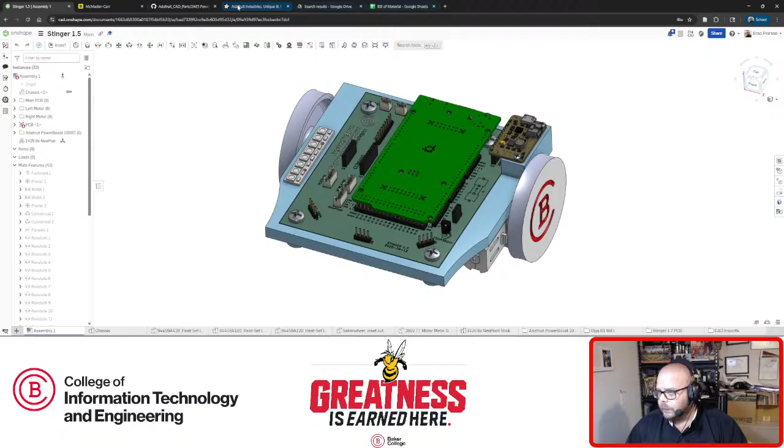So let's dive right in to our design, and this is where we left it off. I was just playing with some other tabs because on today's docket is getting our sensors put in this guy.

We stopped last week. We got the main Arduino board in there. That took a lot longer than I was expecting. We also got blocked in.

These will be little LED strips, Adafruit calls them neopixels. The idea behind those is just to give it some bling. These things are mostly intended to draw attention and interest from students at college fairs and career fairs, so giving them a little bit of the shiny is kind of a good thing.

I think we will dive right in and start getting some sensors in. When I brought the screen up in the first place, I was looking at the bill of materials because some of the sensors I need are in here.

Things like this here, the long distance IR proximity sensor - that's a sensor that goes underneath. On the existing robot, grab one of the originals here - underneath are two of those sensors. The idea is those are light sensors we can use to follow a line, do the whole line following thing.

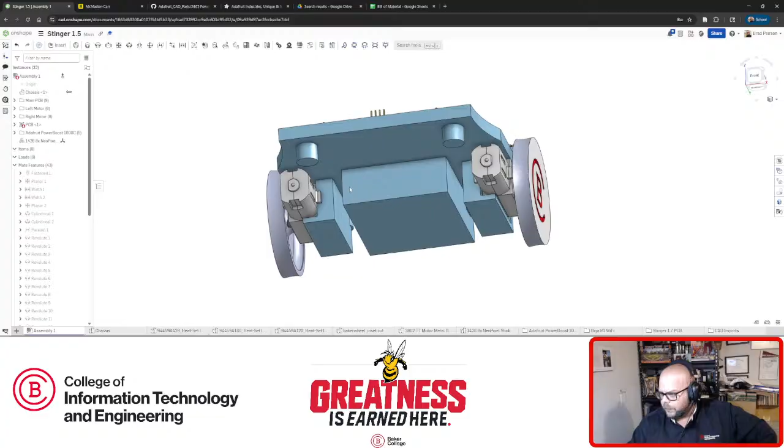So what I started to say - all of those things go underneath, but I've also made the decision to add 3 sensors to this guy that don't point straight down, but point forward. In fact, the plan is to orient them the same as these connectors on the top. As I keep going, I don't clean up my desk, so I end up with a pile of parts.

The ultrasonic sensors ultimately will get plugged in, though, and again, the solid model there I sort of screwed up when I did the PCB design and used male pins instead of female sockets, which doesn't really matter - they have the same footprint. These get soldered anyway, so from a mechanical design standpoint, they don't matter.

At some point I probably want to trade them out so I can get everything in here and maybe do a rendering, which I think would look kind of cool. Of course, to do that right, I also have to get the connectors for these cables and the wires in, the few wires that will be in here, which is frankly kind of a pain.

Might be worth it to someone watching this in the future - hi from the past, by the way - to show how to do wires in sort of a quick and dirty way. It's not really mechanical design, though. That's strictly to get the wires in here, strictly for appearances. So we'll get there when we get there.

But first off, the sensors are sort of facing forward, and I also have Adafruit open already in my tabs, because honestly I don't remember the sensors I bought for those. I went with IR, and I think time of flight. I'm just going to hit this - I don't remember. And the bad part is they're already sitting on my desk back on campus. I don't really remember which one I bought. I don't think I paid $15 for them - that would have been kind of weird of me.

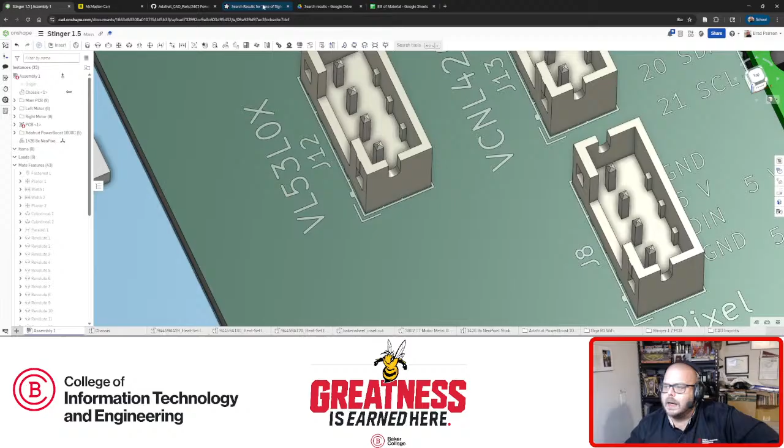53L0X - 53L0X is this guy. And that is product ID 3317. So I'm going to hop over to their CAD library and see... 3317, we don't have one. Well, we got a 3316 - does that match one of the other guys? Not one of those.

3967 is a thing. 3967 is not in there. Well, let's scroll all the way down - maybe something got out of whack, just to make sure. Yeah, I don't see it. VL, I wonder if it might be under the VL something. Maybe, I don't know, let's just make sure. Just double check, make sure nothing's getting lost here in the alphabetical - but it's kind of easy to be alphabetical when everything's named numerically, right? So everything should be in numerical order, I would guess. I don't see anybody hidden.

Panel mount LED. So, all right, what's one of the other ones? 3317 doesn't exist, 3967 does not exist, 5425... 5425, 54... Nope. Man, striking out all over the place.

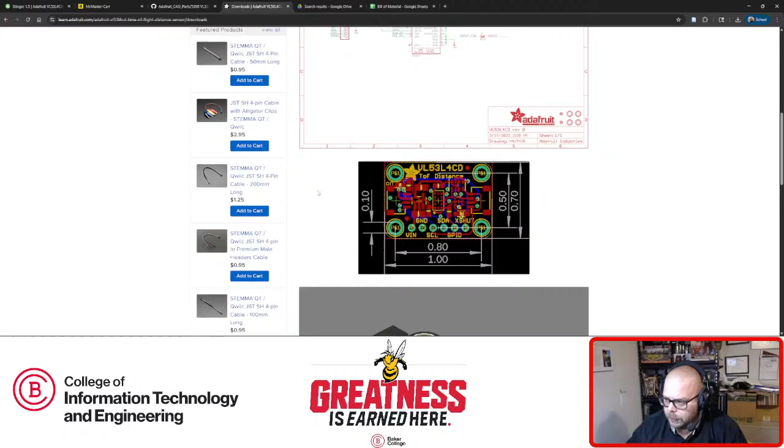If we switch back to our model, measure, parallel axis, 0.8. And just for verification, go vertical as well. Not min distance, because I clicked wrong. I don't want min, I want center. Half an inch on center. So probably not the same part number, though it's based on the same PCB. So they changed some components apparently to get a different range, which is fine.

It's good for us. So first thing I want to do is, I know when I bring that in, it's going to give me a hassle as far as mating things, right? If I mount this PCB, we've seen it before. So I need to first fix. I like to fix the board; it doesn't really matter what we fix. And then we're going to select the board and everything else, shift all of it, and group them together. That way, once we accept this group, when I bring this assembly in, nothing will move, and that's carried over to this.

And I'm actually going to use this assembly. These are effectively the same assemblies, and I don't know why I get two when I bring parts in that way. But I'm going to use this one because then in my bill of materials it'll actually show up with this name, which, even though not quite the same part number, gets me kind of close. So I'm going to go ahead and bring one of those in. Just one for now. Did I not hide the rest of those? I guess not. We're going to bring in that guy.

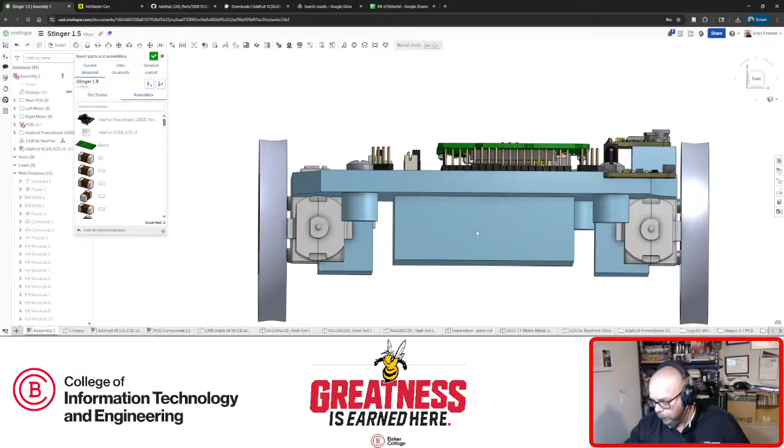Alright, I'm going to put it up here. Now again, these need to be mounted, and I'm going to mount them underneath, because we can't have anything hanging up. If we look at how these ultrasonics mount to the front there, I can't have anything sort of up, otherwise it'll interfere with the ultrasonic. So my only option is to hang them down. And the cool part is we've got the motors and stuff hanging down here, so it's not really adding any height to our design, which I like. Keep things nice and slim.

So what I need to do first is get a platform, some sort of backing in here to get this guy mounted. The thought process running through my head right now is how best to do that. I need to get that guy in there underneath here in a way that lets me still mount everybody else. And since I know I need to have one angled, the front one's kind of easy, right? I can always stick a rectangle down here and get the front one.

But what I'm thinking right now is I kind of need to make sure I don't encroach on this screw hole, because if I just put, let's go ahead and edit the chassis, and I'll show you what I'm sort of thinking about. If I just sketch on this surface, and if I just sort of put the platform, let's create an aligned rectangle. If I were to just extrude like this way, I'm going to guess at what a 45 is. Like, I need that much material to mount the board. I'm going to be hanging way out, and I'm going to be in that screw hole. And effectively, the screw hole is going to be in the way, right?

The screw hole, like, in reality is not in the way because the screw hole is kind of inviolate. I need that to be left alone. That's sort of mounting my main PCB. So that's sort of inviolate. I can't touch it.

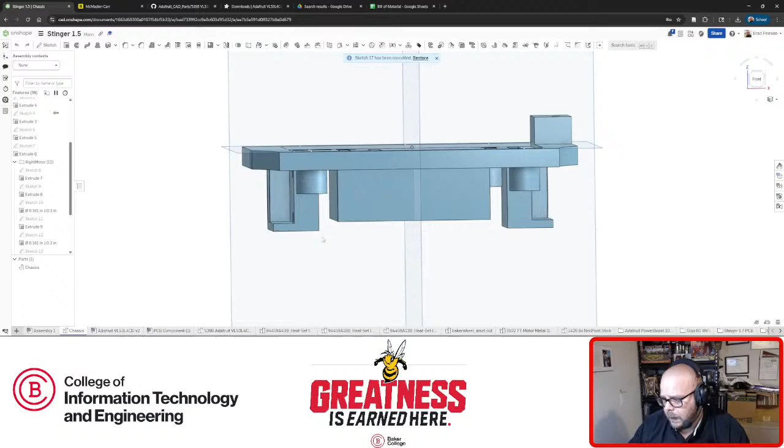So, I mean, I'm kind of curious. I'm wondering if I could go right off of this surface, sort of bring it down, bring whatever mounting feature I create down, and then use these screw holes to sort of hold it in position, be the material that holds those mounting areas in place. That actually does not sound like a completely terrible idea. Let's do it. Why not?

But what I'm curious about, what's the height here? Parallel distance, 0.641. I mean, I got plenty of room. If we look at the assembly, I got plenty of room between the underside. This is the underside of the motor mount and the wheel. I got plenty of room to come down even further, but I want as much, for no good reason, by the way, I want as much ground clearance as possible. No good reason. But I want ground clearance.

Now, that may change. I will be honest, I have not looked at the specifications of that IR sensor. So I may have to get it way down low anyway, but for now, I'm going to work with the idea that I want to maintain as much ground clearance as possible, and I basically have 5/8 of an inch to play with. Is that enough? Now is going to be the question.

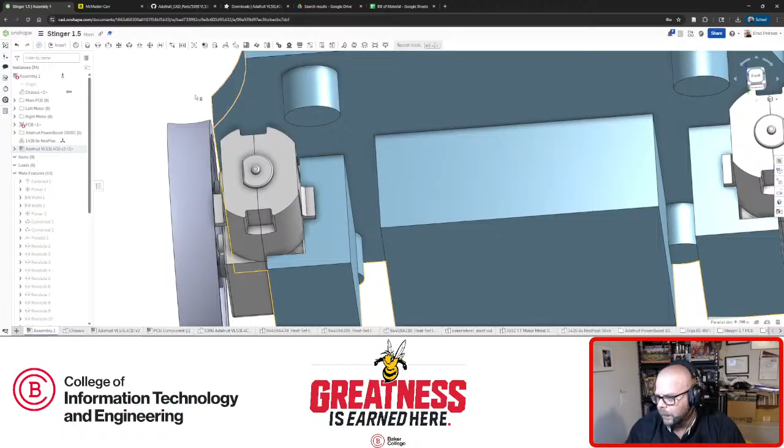So, what is the total width of this thing? If I mount it, obviously narrow side, sort of vertical, 0.7. So I'm not going to have enough, but that's still okay. It'll be hanging down a little bit if I use this surface, this plane, as the basis for where those mount. I kind of do like that. I kind of do. Now I'm trying to think about the best way to, like, I want to use these as the plastic, the material that holds the mounts in place.

Aesthetically, I'm jumping ahead to looks. I'm not going to like the look of just two cylinders hanging out down there. So I'm probably going to add some material in between, even though that increases our weight. Probably going to add some material in between just for looks, and make this, rather than two independent cylinders, make it, I don't know, a rectangle, a bean shape, or a slot shape with rounded ends. Something like that is where my mind is going right now.

So let's go ahead and do that. Well, I can always do this. I'm going to go ahead and, well, I got to be on the chassis first. And we need a bottom view. I'm going to go ahead and sketch in whereabouts those features need to be. So I'm going to create a sketch on this plane, even though I'm going to add material before I actually get around to really creating those mounts. But for now, I just want to sort of sketch in where they need to be.

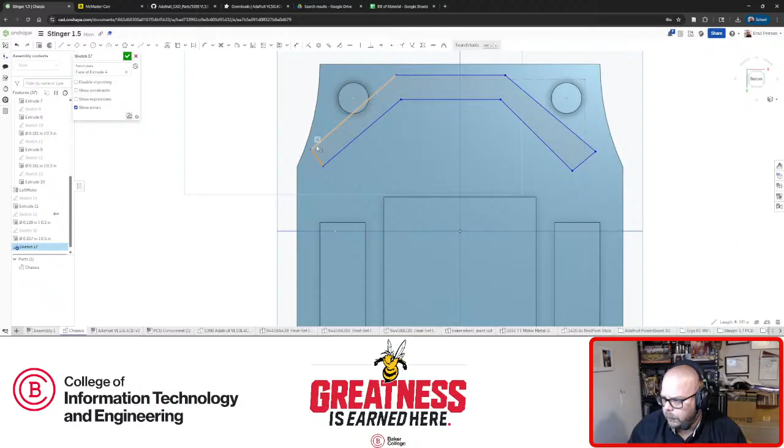So we're going to go here. And at this point, I'm guessing. This is just a guess, but I got one pointed forward and two pointed out to the side at 45-degree angles. So we're going to start to constrain the sketch. Those guys will be perpendicular. These guys will be perpendicular. Nothing up there will be, but these will be perpendicular, as will these. And things will move around. That happens sometimes when you're dealing with this stuff. Except, why won't you let me? Has this got to move in? Will you let me swing it then? There we go.

And with it being underneath, we can kind of leave it set back. I like that. That means this sort of leading edge of the chassis will act more as a bumper. Like, if they run into a wall, they won't be smacking into my sensors.

So we need 45 degrees. Why? Just because that's what the originals were, and I don't see a reason to change it. So we need 45 degrees between here and here. That'll bring that in line. 45 degrees between here and here.

All right. Now, I'm also going to go back to the assembly and grab sort of the, and actually I don't need the assembly, I just need this. So overall, I'm going to go bigger than the board because we also need to get the screw bosses in, the threaded inserts. We can't forget that we need enough material for that. So I'm going to go longer, but we're an inch long. We need an inch for the board.

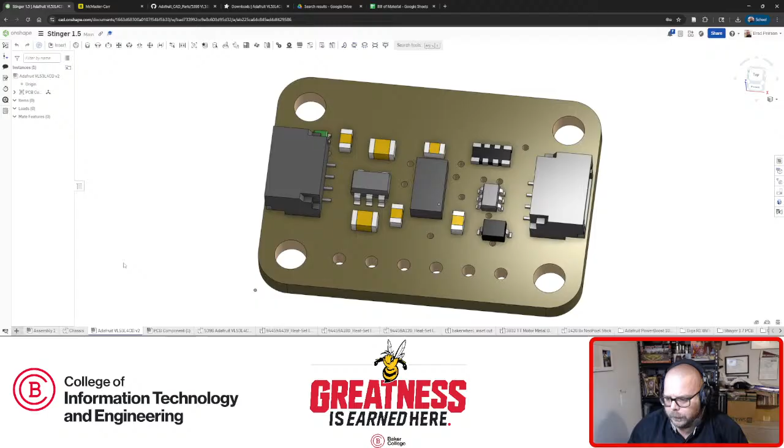Not Alt-Tab. That's a workflow thing, SolidWorks. I'm used to Alt-Tabbing. And I want chassis, not the assembly. Go back to the bottom view, make sure we're good and square.

So we need an inch. An inch and a half should be plenty. Again, that's just a guess. There's not really a thought process behind it. Just an inch and a half feels safe, right? We need an inch and a half to mount the board and leave us enough material.

So I'm going to set these as equal. I was going to define an inch and a half at each, but I like equal better because I know they're all the same part number. I'm also going to set this equal. I haven't set the thickness yet, but I'm going to set that equal. Equal.

And I need a construction line. So I can still move this, right? I can get way thick, way thin. I don't want that. I want this to be uniform. Like I say, I don't know exactly how it's going to end up looking quite yet, but I want it uniform. So I need a construction line to make that happen. And I'm going to go center to center, basically. Make this a construction line. There it is. Now I can set that construction line equal to the two ends.

Now no matter what I decide, I haven't done the mathy yet, equal. So now we're equally spaced. Once I set a thickness, it'll change everything. But we know we got an inch and a half at least. We know we've got enough material for screws.

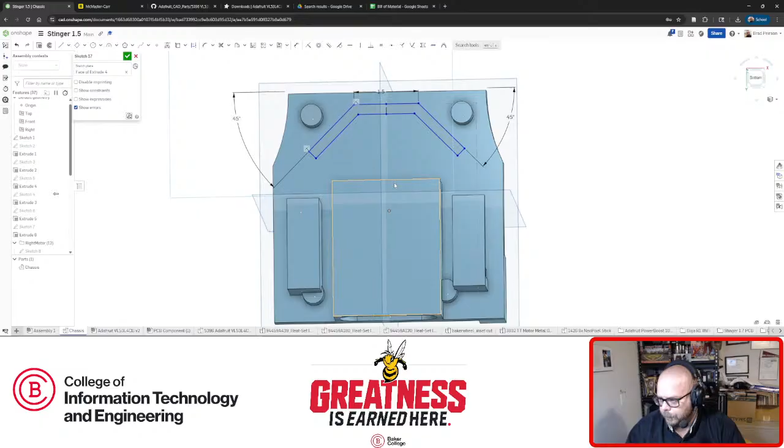What do we want to do? If I do this sort of this way, about where I've got it, I can build out from here. Rather than just sensor mounts for those 3 time-of-flight sensors, I can make this an entire surface for the purpose of sensors. I can squeeze the 2 light sensors for line following in this gap. I can also squeeze the RFID on it. So why wouldn't I do that?

Let's just focus on this for now. I can always add material to make a whole sensor platform, because right now I want to make sure that these are in the right spot for the sensors I'm on right at this moment. And that's all I'm thinking about. So where do we like? I kind of like it where it is, just for looks. It's behind those screw bosses.

I'm gonna have to come up with a way to get all that attached, because right now I'm floating out in space. But for now I can at least lay it out and come up with a plan.

The other option is, since I know I'm not going to hit those screw bosses now, I can always accept the sketch, and I can edit. Well, maybe I didn't need to accept it. I can change the sketch plane to this, and it won't affect anything. So now it's on that, and when I extrude, it's sort of automatically connected.

I'll just have to make sure now when I extrude, the material between the bottom of the chassis and the bottom of the screw boss is dead material. So I need to come out that much before I even consider the height of the sensors. That 0.7, I think it was.

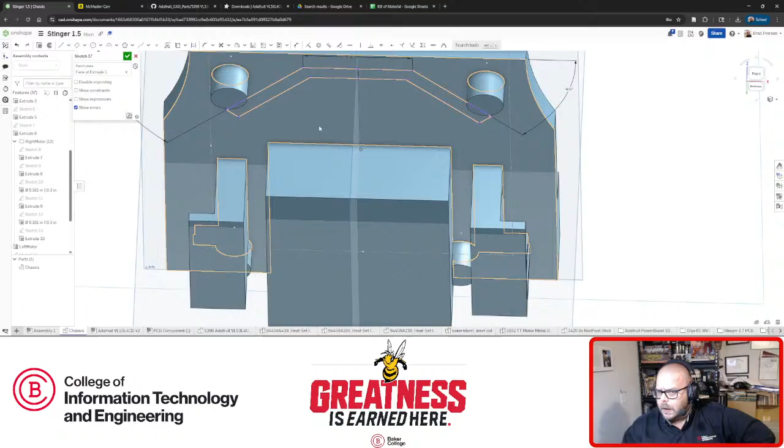So that's a thing that I need to remember now that I've done it this way. But that works. I am not unhappy with that, and I think I like that plan of getting those others. So I am going to change my mind, and I am going to get those other sensors in there.

And those sensors were, the ones that exist, the light sensors, are 6064. So without even going to their website, I'm just going to jump in here and see if I can get a 6064. Yes, I like it. The step file, download that and get it into my assembly. So here, import 6064. Import again. I'm not going to worry about the composite because I'm wondering if I can tuck those right in here and do this as one platform.

And then for the RFID, I can just make the battery compartment taller, and really just tall enough for some threaded inserts. Like, we've already got material here. It's about as thin as you can possibly get for the battery. But if we just add on to this surface and make it taller, add plastic, for threaded inserts for that RFID board, that wouldn't be a terrible idea, I don't think. I mean, I don't know. It's a guess, but it doesn't sound horrible.

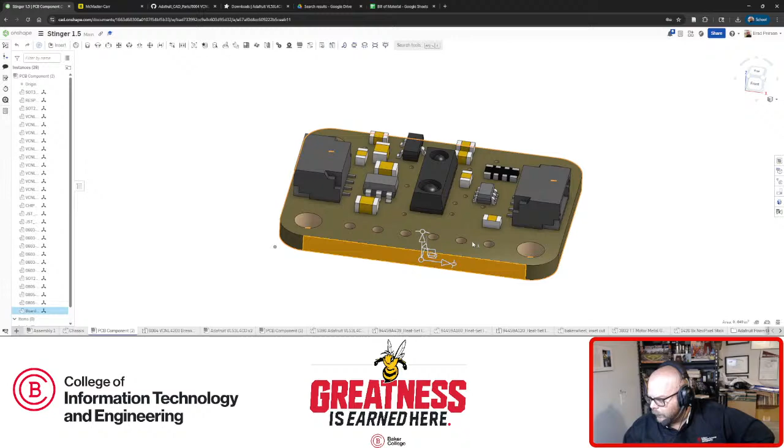So did that actually bring that in? It did. So this is the other board. Tell me it's got the same footprint. 0.7. Yep, same footprint. So I think to lay it out, I'm just going to put squares in that sketch for now, or rectangles. 0.7 by 1. Is that what it is? 0.7 by 1. And do that.

And what does that look like if I go back to the chassis in the bottom view and just drop, I want it straight this time, here and here. And if I just go equal, whoops, no control, just click, folks, just click. That's one of the workflow things, Onshape versus SolidWorks. Just click, no control, click. So equal, and I also want coincident, I want them in line. Coincident, and make this a 1, and make this a 0.7.

Now I'm going to probably delete these. Right now they're just here to see where I can fit things. I want to spread them out. I need to be very careful right now that they don't get too close together. They are electrically going to be daisy chained together. These connectors, there's an in and an out. You can daisy chain them together on an I2C channel on the Arduino. Let me double check that and make sure I'm not completely making things up. 6064, I believe they're I2C.

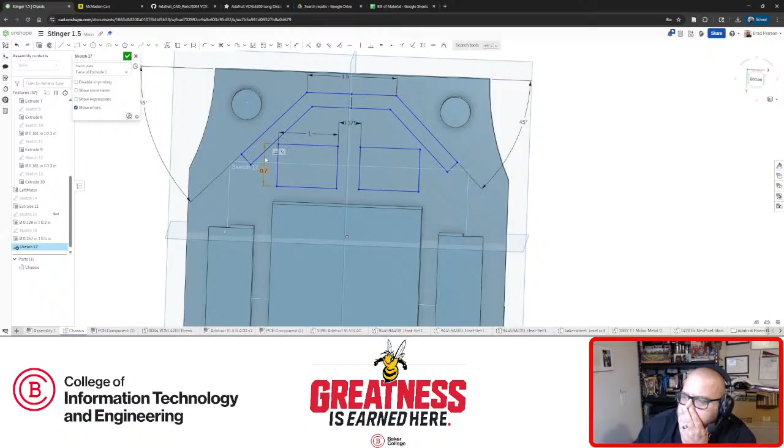So let us head back to our chassis. And I guess we just sort of guess at a dimension between them that we want. 3/8. That's not very big, but also it doesn't really need to be. I need enough room to get the connectors in and to be able to bend the wires enough to tuck them up somewhere, right? Because the pigtail is only so short, so it'll be tucked up maybe in here somewhere. I kind of like where we're at. I kind of don't like how much plastic I'm about to add.

So before I do anything else, I need the thickness of this correct. Yes. Me speak English goodly. I need this thickness correct, which means I want my board here. So that is a 0.098, handy dandy calculator. 0.098, 25.4, and it helps if you use the right direction. That's a multiply, buddy. 2.5. Did we have a 2.5 millimeter somewhere? I'm trying to also commonize screws.

I'm also trying to commonize screws, and I don't want to mix and match too many different types unless I can help it. So what was this? That's the smallest one we have in here so far, and that is an M2. So what was the diameter of this hole? Let's deselect. What was the diameter of that hole? 191, that's even smaller, so that truly is an M2 hole.

But I think we can get away with an M2 screw in a 2.5 millimeter hole. In fact, I think that's probably the good plan. We're going to use M2s. We'll go with that. So that said, we need to head to McMaster for our handy heat set inserts because I don't remember the depth I needed.

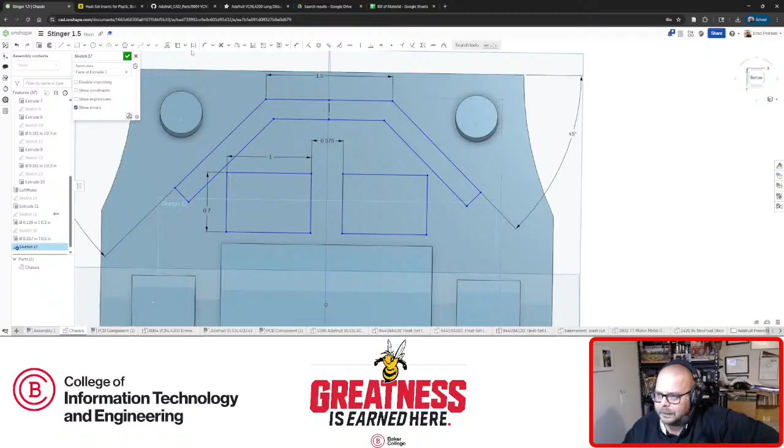185. I'm going to call it a 1/4 of an inch. Now, in the case of these, I'm going to call it a 1/4 of an inch just to give about 70 thousandths of material behind it, so the inserts don't stick out. So I can set that right now before I forget it, and then I don't even need to write it down. Look at me remembering, good practices. So 1/4 inch. That gives us like 65 thousandths over what we actually need. That's great.

And I think what I want to do is I want to back these up a little. And I think I'm going to want those to land almost even with the battery box. Well, for line following, forward is probably better because then it'll catch the line a little earlier. But for layout purposes, I don't see that being feasible. I mean, I could come out, I guess, even lower than where those forward-facing sensors end up. That's not the worst idea I've ever had either.

And they land in there, and that's actually going to get us away with the minimum material. So change of plan. I was going to make a big piece of plastic, something like this shape that I have. If you could imagine a line or a curve, I was going to curve it between here and here and make it nice and pretty. But I think what I'll end up doing is extruding this shape first to the height I need it for those sensors, and then adding material onto it, sort of in this neighborhood,

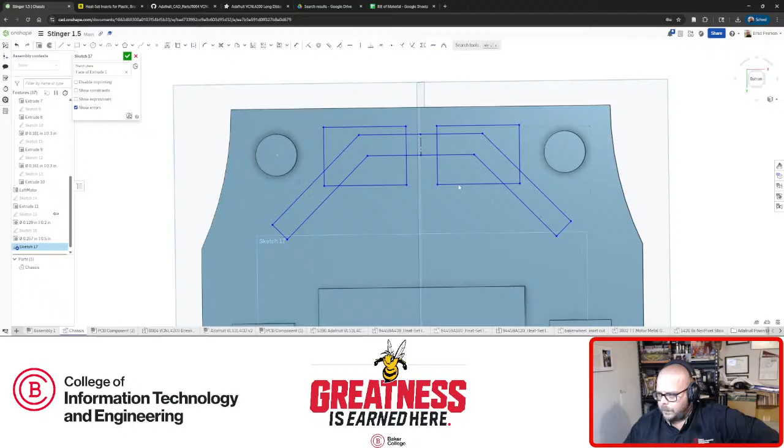to get those line followers, and even for aesthetics, I can center those between the holes, and that would look, I think, pretty good. Aesthetics, like I said, at this point in the design, I keep saying it's as much art as it is science, and it's what you think looks good, right? We're designing a part to be 3D printed. In 3D printing, with even a cheap 3D printer, I can make almost any shape I can imagine. So it's just making it look the best I think it can look.

And I think that's going to end up being the best, if these are in this neighborhood somewhere centered, I will also line this up with the center of the holes. It'll be nice and offset back. I like it. Now, on these parts, the one thing left that I want to check, I need the assembly, not the individual parts. There's nothing on the back of this board. Oh, there is. That's right.

Well, no, because I'm using the I2C connector, I don't need to worry about those. There will be nothing in those pins. Like if I look here, as long as you use the I2C connector, you don't need headers there. The headers are there if you're not using the Qwiic connector, they call it.

So that's what we're doing. And why did I grab a $14 sensor and not a $7 sensor? What's the range on this guy? Does it tell me? 1.5 meters. Nice - oh, that might be what killed it for me. 50 to 100 centimeters is their target range, but the ones I grabbed are good for a true 1.5 meters time of flight. That's really the reason I decided to switch off these for the forward-facing sensors.

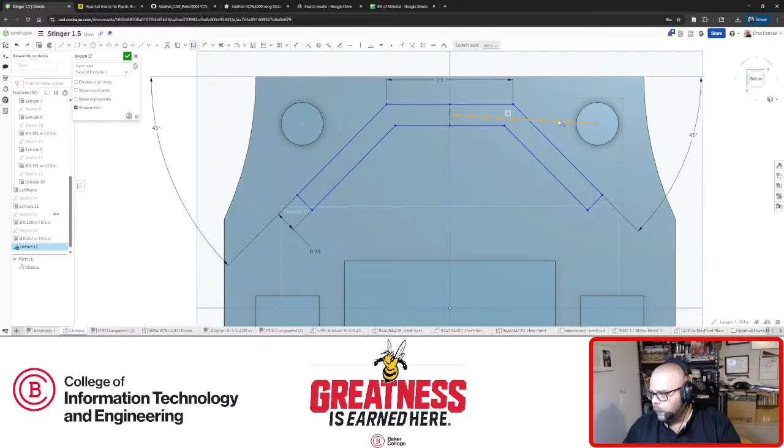I do want to position this guy. I'm going to construction-line it to one of the holes - the holes are on the same line so it doesn't matter which one - and make it horizontal. That will lock everybody in. It's centered now.

We got a 45-degree view, and we're actually pretty close to in line with where the ultrasonics will be. The ultrasonics are a little forward of that, but everybody should work out that way.

So now I need to extrude. I'm going to accept this sketch, that's it. Again, in the future I will come back and fillet everybody - I'm not going to leave it angled like that, it'll be nice and rounded with fillets toward the end. But for now, like I said, this is dead space.

I've got to come out this far before I even figure in how much taller I need it, and that distance is 385 - handy dandy scratch pad, it says 385. So we are 385. And that sensor board is 0.7 tall, right? Is that right? 0.7 tall.

I'm going to give it an inch and see where it lands, just because I can. So total we need 1.385. Now that might be too tall - we'll see where it lands after I extrude it. That's a distance I can easily change.

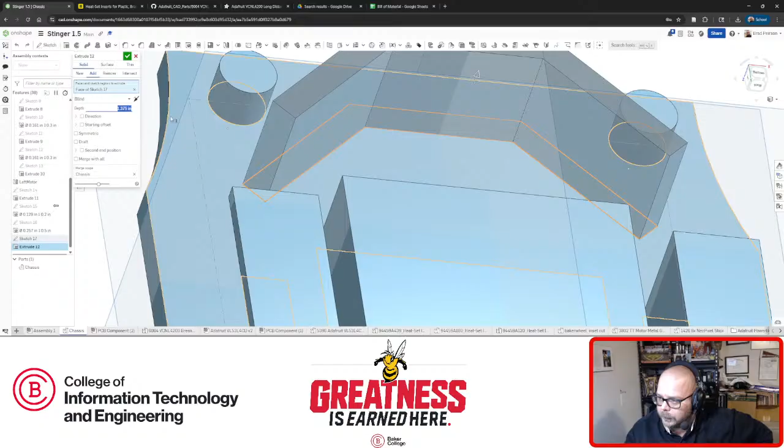So total, I'm going to grab this and extrude it a total of - what did I just say - 1.385. And actually, just for round numbers' sake, I'm going to go 375. Only someone used to dealing with the imperial measurement system would you hear somebody say 375 is an even number. That's a weird statement to make, right?

Yeah, so I mean it kind of makes it look more car-ish, I guess, question mark. But also, looking way ahead, this gives us some material out here that we can maybe put some feet on, like those carriage bolts I talked about previously. I'm not nuts about how far those stick down, but I have an idea.

So let's get one thrown in here, shall we? To get one thrown in here, I'm going to click here and sketch on this surface, and realistically to get that hole pattern in here I'm just going to go like this. I only need a rectangle, because I'm going to grab the points - the points are the holes. I'm going to use the hole wizard, so just a rectangle with some points. I do need it centered, so grab a line, construction line centered here.

Construction line - don't forget to set it vertical and make sure you're in the middle. Let's go to the front view so everything's nice and lined up. And dimensionally, I was, what, 1 inch by 0.7?

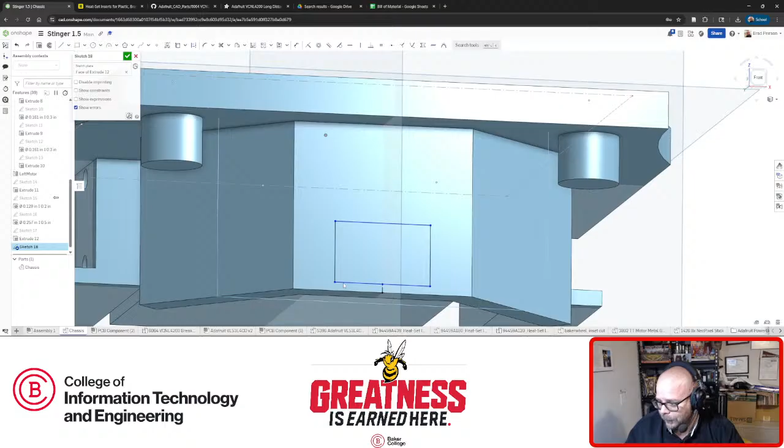Good. Now what I really want to see - because what I'm thinking is, looking at this, I went ridiculously tall. Somewhere I screwed up my measurement by a lot, right? We're almost twice as tall here as we have to be. So my comment about this being way low is going to change in a minute. But I'm also thinking the sensor itself, the board, does not have to be below these screw bosses - the sensor does, and that means it could probably be up in here somewhere.

So I'm about to start taking a look at some measurements to see about where that is.

If I just go shoot for the top of the sensor to the top of the board, it shouldn't matter because it should be in the middle. So 262 there, 263 there. It's in the middle, right? So if we call it a quarter inch, that gives us 10 thou.

I don't know how accurate this model is. Like if this sensor block thing is actually dimensionally accurate, I have no idea. But if I call it 260, I got to go the other way, 262. So if I call it 300 thousandths... well, if I just place... no, because I want this.

So 262, I'm going to put a line in my sketch, and I'm trying to think of the best way to do this. It's going to be a construction line. And I'm going to put it 262 away from the top. That sounds like a winner.

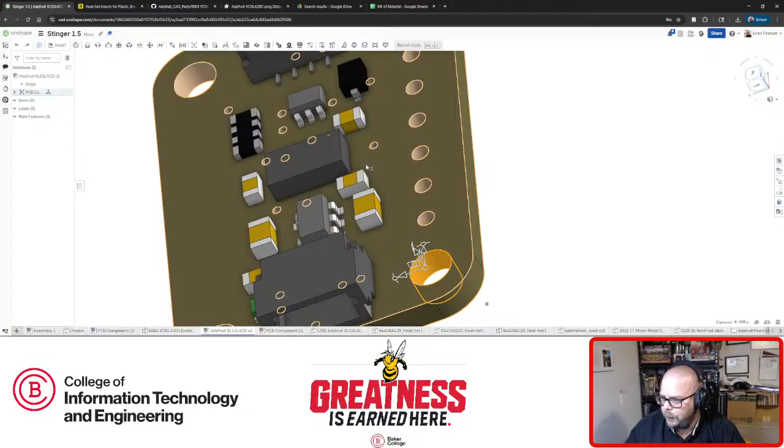So this line now, why does that not feel... oh, because it needs to be from the hole. Important note, it didn't look right. It needs to be from the hole because that rectangle is not the board, it's the hole. So from here to here, and I don't want min, I want center.

162. 162, and again, not Alt-Tab - that's a SolidWorks habit, no Alt-Tab here. 162. That looks a little better. So this represents where the top of that sensor is.

And now I want to define this whole position of this pattern based on this line, because I don't really care where this lands, right? I got all the material behind it that it needs. I don't care where it ends up. So can I dimension off of that surface is the question.

That would be ideal, like if I could say I want to go from here to here and have it be 20 thousandths, 30 thousandths, whatever. That would be ideal. So let's try it. Here to here - will you let me? Oh, look at you. Let me grab a front view so I can just make sure that that's...

So I have noticed, we need to be careful because SolidWorks doesn't do this. Onshape does - whenever these are construction lines, as soon as I bring my cursor, it treats it like a diameter, which is actually kind of cool. I was doing a different part earlier today for another project and used that a lot. That comes in handy, so I'm not knocking it, but it's the thing to remember, right?

This is diameter down here, we need to be up here. And we don't need 100 thousandths - I'm actually just thinking to start with 50. And that makes sure that the top of that sensor block is below the screw boss, which means if this is in line, the ones on the side will be below as well.

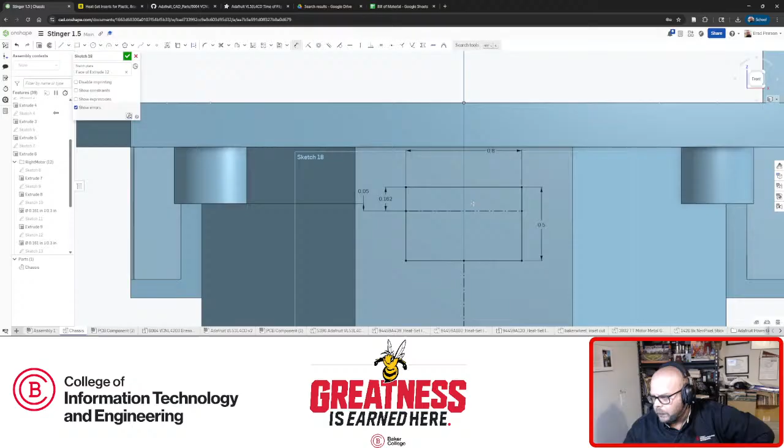Like the actual sensing thing is also below that surface. So for 50 thou low, the actual sensors, which are these dots, right - one's an emitter, one's a receiver - that will actually also be lower by that little bit. So 50 thou should be good. And that's sort of the thought process I'm using for that idea. So yeah, I'm going to call it good there.

I'm going to call that sketch good. Now I want to measure from here to here and see how much of this I can cut back off because I way over-extruded. So we're at 0.602 - I can cut off at least a half an inch of that, like at least. What extrusion was that? Down here, way down here. Extrude, edit.

875 should be less half an inch, right? 0.875. So again, this won't be vertically centered here, but that's not the important thing. And we probably don't even need the 875, but honestly, now that we're back sort of in line, I'm curious - is that exactly how tall the battery was? Yeah, so it's exactly in line now with the battery compartment.

This bolt pattern won't be centered vertically here, but that's not the important part. The important part is that this construction line, the sensor, the board doesn't need to clear, but the sensor does, and it should, if things are okay. Now I'm going to get kind of spicy.

This is me just wanting to play with Onshape. I'm going to duplicate this sketch on these other two faces. I want to see if I can put holes on all of those sketches at the same time. I don't think SolidWorks will let you do that, you have to use only one sketch. I could be wrong, I've honestly never attempted it. But I want to see if it'll let me do it here. So I'm going to do it.

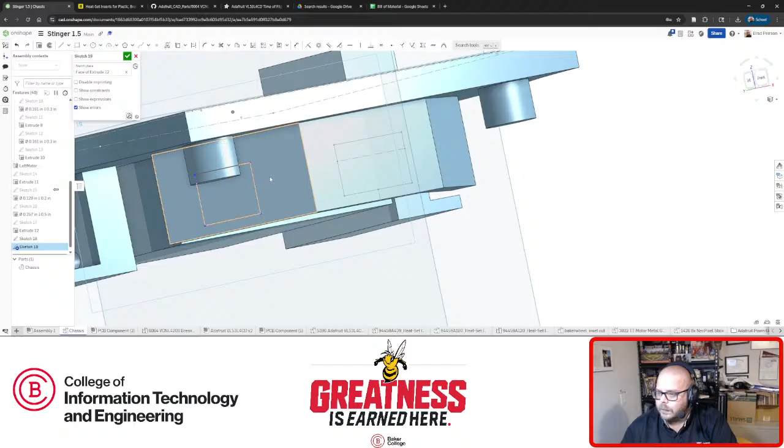And then all I have to do is center the thing with a construction line. Except I screwed up, I screwed up an equal somewhere. My rectangle is not nearly long enough. This and this are equal, this and this are equal. All right, I'm getting the impression that the equal thing is not working out the way I wanted it to.

What if, let's undo. All right, so we're raw, we should be pretty unconstrained. What if I make them in line? I'm just trying to cheat, also playing and seeing what Onshape will let me get away with. All right, so I just made these in line with these. And now what happens if I make, well, let's try the top. The bottom one clearly didn't work. Yeah, see, it doesn't like that equal, which is okay, I guess.

I just have to get that dimension. What's the length of this? That was the 0.8. Here, 0.8. I don't need to worry about my construction line across because I already set it along the same perimeter, set it along the same height, right? So it should land in the same spot, so we should be good there. I just have to center the thing. I will need a construction line for that into the center of this guy.

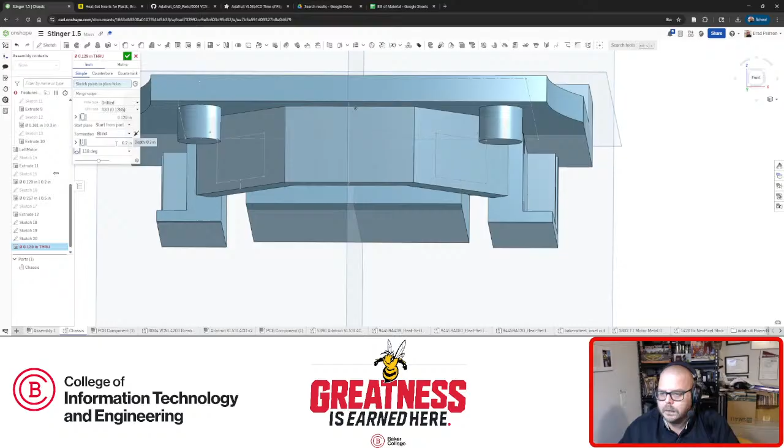So termination blind, 0.2 is already there. Make them flat just like every other one. Now sketch points here, here, here, here. Oh, that's lovely, I like it. I like it, and that's exactly what I wanted to see.

And it would let me do all of those sketches at the same time. That's kind of awesome. So, except that, that's good. Those are all my screw holes. Now, I think I'm okay with that.

Because again, if these were pressed in, I would want more material there, because what will happen is as you press, you're sort of by definition moving the base material. A press is an interference fit, that material's got to go somewhere. The heat set inserts we're not pressing in, we are heating, and the plastic around them is liquefying to make room for the insert. So we should not need as much wall, and we shouldn't get bowing.

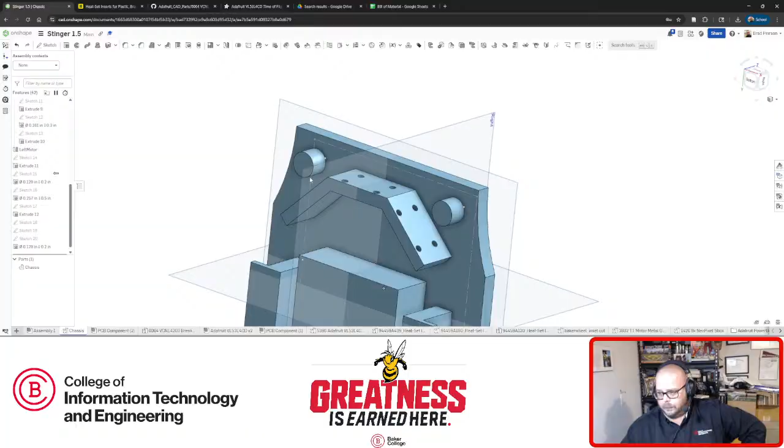Now, I'm well aware of what I just said there, and that the word should is very strong. So that's really one of those things that I'm not going to know until we build one. We know for sure until we build one. So, but I do kind of like that. I do kind of like that. I'm kind of happy with that.

Well, the question was in the back of my head. One thing to pay attention to that just hit me before I have that other aside thought. As I was spinning this around, one thing I noticed, we want to make sure that in all the fanciness that I just did, we can still get at these with a screwdriver, right? All the plans in the world kind of fall apart if we can't actually get to these, one, to put the inserts in, two, to get the screwdriver on them. So that should have plenty of room for both. The soldering iron, honestly, might get a little tight with the heating tip on it.

I kind of live with that. I think we can get it in there, even though it'll get a little close to this. And besides, if that's a worry, these are definitely worries, because those are a lot closer to the walls than the other ones. And plus, I don't necessarily need to heat them all.

I have had good luck with these types of inserts in the past, just pressing them in. They do hold pretty well if you just press them in. The knurling really does a good job of holding. So I might be able to get away with that if, when I go to assemble these, I run into an issue. But yeah, like I said, I kind of like that. I'm kind of happy with that.

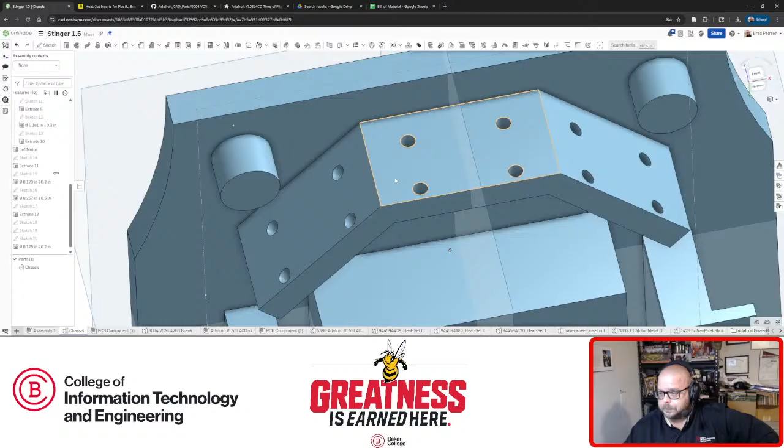I do want to make this transparent quick and just check that those holes have enough backing. I think they do. I think that's enough. And an important thing that I got to keep remembering is, realistically, until I get this in the slicing software for the 3D printer, I'm not going to know what direction I want this on the print bed, right? I have no idea yet.

And so, some of the walls on the bottom of these screw holes might be too thin, depending on what direction it's on the printer. I just don't know. So it's a thing that we'll have to work out later. That's just sort of the nature of it. Now, I need to get those other sensors in.

And looking at this, what I was going to say is I kind of like how this is even with the battery compartment. But I had already talked about how I'm going to make the battery compartment, or at least part of it, taller for that IR sensor. So it will officially no longer be the same height as these, which means if I add material on the bottom for those two downward facing sensors, it's not really going to make much of a difference.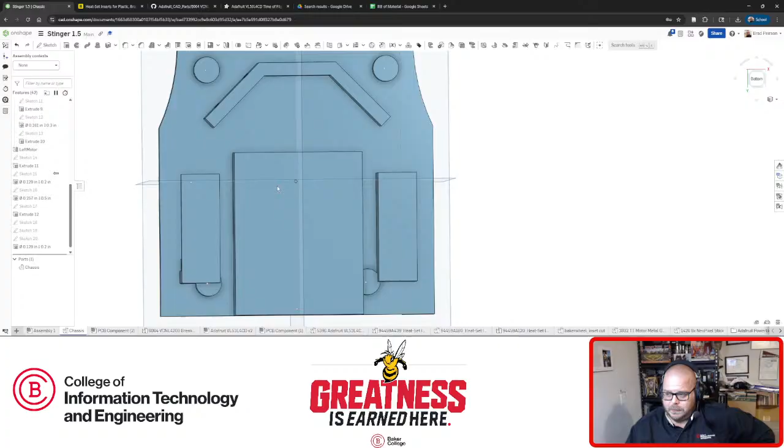So I might as well come off of this and go sort of up for those line followers rather than forward like I had talked about. Come up, put the line followers in this pocket where I sketched them originally, and the RFID toward the back. And given that this thing has two drive wheels, the way it turns is by counter rotating the wheels. It's effectively zero turn.

If the RFID is back here, sort of centered between the wheels, then that actually works. Centering it between the wheels, that way the zero turn takes effect. When it sees an RFID tag and makes a turn, it will truly be at the intersection of two lines, which, in the immortal words of the great Bob Ross, is a happy accident, but I'm very cool with it. So I'm going to do that. We'll plan on that.

We'll shoot for the RFID sensor to land here, and those two color sensors, line following sensors, will just basically extrude a new rectangle from here out, up toward that angled mounting area. And I like it. That will work out, I think, very well. So, yeah, let's do that.

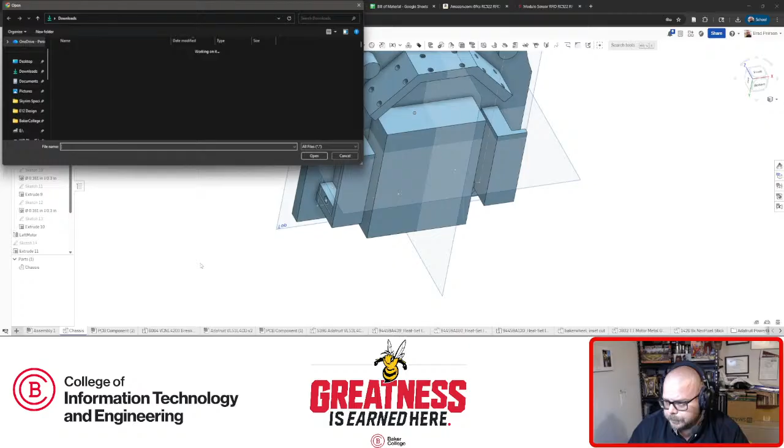Let's bring it into our model here. Again, I'm not going to do composite. It didn't help all that much, really. Now this one, I do remember that much, does have, I can't rotate this picture, header pins. This one we will have to remember to cut in a pocket to give those somewhere to go. So are you done bringing it in? Nope. We are post-processing.

That should mean it's open, I think. Imported with errors. Now, honestly, I do not care much that it came in with errors. I don't know what those errors are. A faulty topology. So that means when it brought the step file in, there's probably an overlapping surface or something funny. If I were modeling it and it gave me an error like that, I would chase it down and freak out. I don't care. It is what it is.

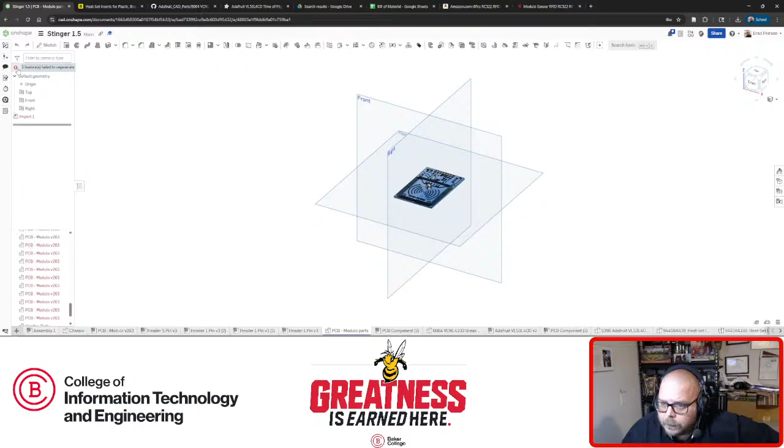What if I click the individual parts? I'm just looking to see if there's something like a heal, right? Because I can't do that. One feature failed to regenerate. Yeah, that's the feature because all of these parts failed. I'm going to go back to my original thought and say it doesn't matter, and I'll leave them broken. But what I do want to do is the fix group trick.

What happens if I delete all that stuff? I was going to say, is all that somewhere else, but it's not. If I select all the faulty stuff, yeah, including the PCB, great. So, again, doesn't matter. Fix that guy. Group all these together. I'm going to hope I can do even the assemblies. I haven't tried it. Group. Did it select them? It kind of looks like it did. Header, they're in there. Accept that.

Now, in my assembly, I'm going to bring it in. Insert. Whoops, not other documents, I want assemblies. And I want PCB modulo V263 PCB. Are we not alphabetical, or did I just blow by it? There it is. Bring this guy in here. I'm going to throw a quick parallel mate. Flip. Okay, just to get it oriented right.

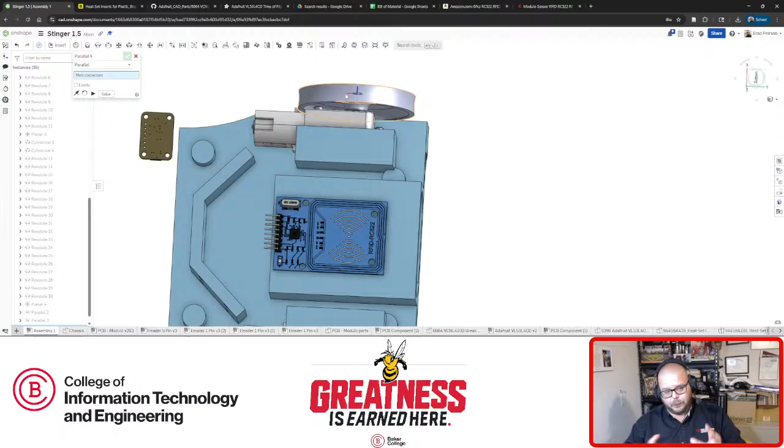When this thing turns and the wheels counter-rotate, it acts like a zero-turn device, which means it would be turning right on top of the RFID tag, which is about as precise as we could ask for. So I think I want the dead center of this RFID antenna, which is conveniently this circle. So that'll give me a feature that I can plan off of. I can get the dimensions, I can get the hole pattern, and then dimensions to that, and use this to line it up. That's the plan.

But the question is, what direction do I want the cable coming out of? Basically, front or back. Back, we got to get here, which means I think I want to come out the back, with the plan being the cable will route up through here, and I can even add some plastic, sort of a half cage here to hold it, so it dives into a little plastic tunnel, back out, and plugs in. I like that. That keeps it out of the way of the battery, so the battery can be changed without that cable getting in the way. I like that plan, I think.

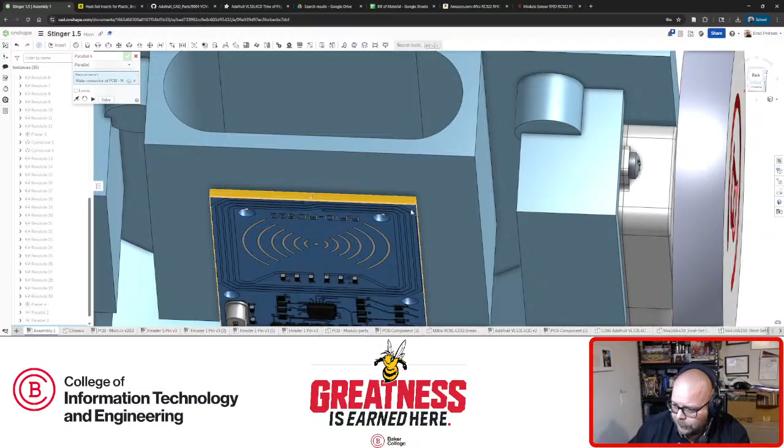Now, the next question is if I can manage to get this centered without hanging out the back, because I do not want to do that. And worst case, we just shift it forward and live with it. Because this is one of those design decision things. I think it's more important to get the cable coming out the back than it is to have this perfectly centered. So, again, temporary parallel mate. I will delete them eventually. I'm going to parallel this with the front of the battery box. We're going to flip it. Good. Grab you, drag you back up here.

All right. So, yeah, we're not going to quite get where I want to be. In fact, I'm going to intentionally do it. I want to have some room. I'm intentionally going to go to the front of the battery box and just line it up there and be happy with it. I could even come further forward, but I want room to be able to plug in, and this is an 8 ribbon cable. I want to be able to make this little bit of a turn up into this channel and back up here to plug in. So to do that, especially with an 8 ribbon cable, we need a fair bit of swing.

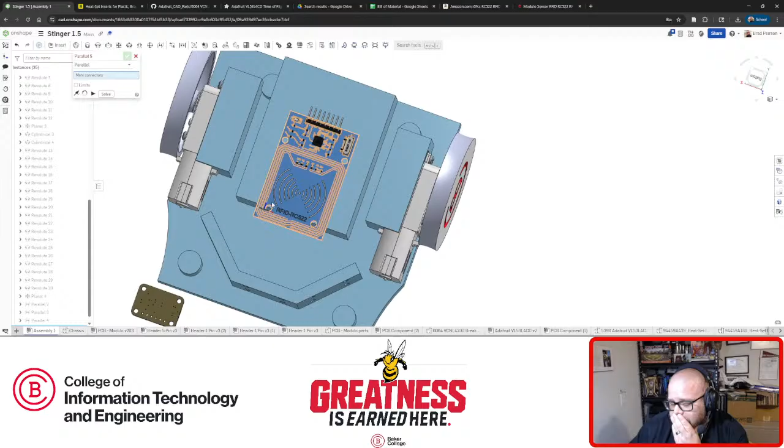It's a hard thing to judge exactly how much swing we need. I mean, there's no good way to know. There just isn't. We're going to be a little out past the end of these pins because of the connector on the ribbon. Those ribbons don't turn real sharp corners. Also, we got to consider that it's going to be hanging down a little bit. I might add a loop of 3D printed plastic here to run it through just to make sure it doesn't drag on the floor, but I don't know if that's entirely necessary.

For now, let's get the thing mounted. Somewhere in this neighborhood, well, let's go flush. The joys of 3D printing means that if this doesn't work, I can always move it and in a couple of hours have a new version, right? Let's go flush. Let's plan for the leading edge of this board to be flush with the existing battery box. Okay, that will be the plan.

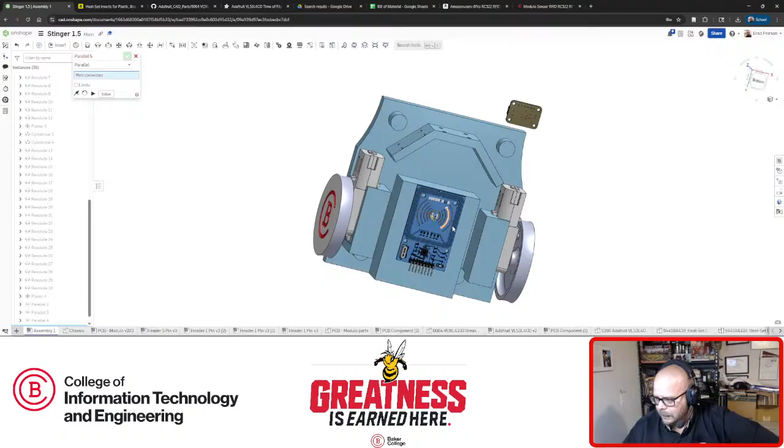Now, how thick is our PCB? Because I am gonna inset it just like we did the boards on the top. These LED boards will get inset. This board is inset. I believe it was 63 thousandths thick. How thick is this? I'm going to guess the same.

Well, there we go. Why don't you let me select a surface? Select that surface. Select this surface. Oh, because I'm in a mate. Did I never accept that mate? That would be tragic. Well, either way, it kept the orientation. They're temporary mates anyway. I will get the screw holes in there and then mate based on the screw holes when the time comes.

But what I want to do is I want to add enough material to inset the board, and I need to cut in for these pins here that stick out the bottom, and I want to inset this whole connector, I think, plus a bit so that at least the plug-in there's plastic there. It's protected-ish. Not perfect, but it's got some non-wire material between it and the ground. How about that? It just feels right, and I'll do that now, and I'll show you why I'm thinking that way.

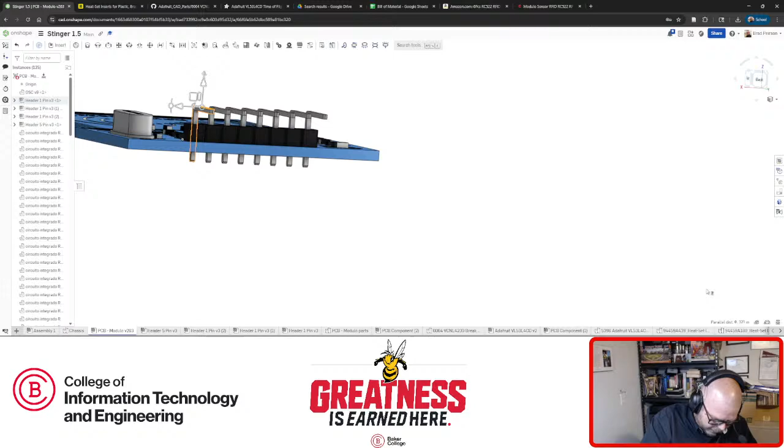So to do that, I probably want to jump to this first. I want to get a height of this, and I want to get a height from there to here, right? Because that is the minimum inset I'm going to do. 321. I'm going to call it 375 because that's the way my mind works. So 375 for an inset, right? That's plenty to inset us. I need that much material for an extrusion plus threaded insert material.

So now threaded insert, how big are the screw holes? That's the question for the insert. 126. And if we go to metric, 25.4, hey look, I remember, so 3.2, we're going to do a 3mm hole. 3mm thread. So heat set, we're going to go back out to 3mm, M3. Again, I like the tall one. Ooh. In this case, I don't like the tall one because half the quantity, almost the same price. That means the price is double. I'm cheap. So I'm going to go the next one up. In this case, I'm not going to design for the tall one.

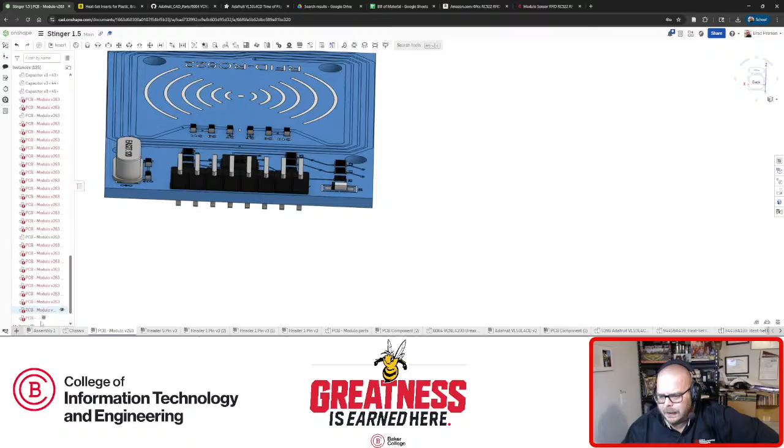We need a number 22 drill. 6.5mm. Call it a 1/4 inch. We have some material there still on the bottom of the battery compartment that we can encroach on, we won't be in the battery. So if I call that a 1/4 inch, and where did I write? This is the problem with my scratch. So 375 is what I needed for height for inset, and a 1/4 inch. 0.25. Looks a lot like 625 to me. So let's do 625. Now the question is going to be, how ugly is it going to be sticking out with a big 625 lump under there, another 1/2 inch. So let's go to the chassis.

Actually, I probably want a few more dimensions off of this thing first, right? We're going to need more material out here for the inserts than between here and the edge of the board. But I'm going to get the board width. 1.553. I'm going to call it 2. That'll give us enough material. So 2 by. Now, I do not need to go all the way out here with plastic, even though I plan on insetting it. So I should be able to get away with just the board. And we should have plenty of material because these are so far in. So 2.362. I don't even really need to be that big.

Like for instance, what is here to the front? I don't want minimum, I want center. 1.74. So if I go 2, I'll just try a 2 by 2 square. And then I'm going to do a quick diagram of the hole pattern. So center to center is what? Parallel axis. All right, I'm almost going to guarantee that that's metric. When you see a weird number like that, it's metric.

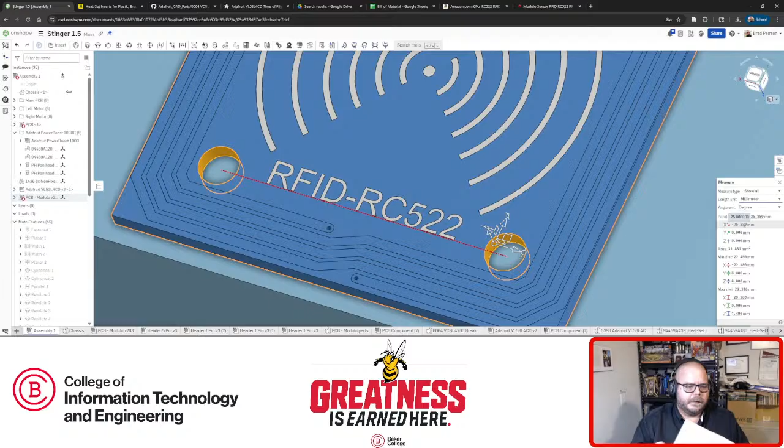So here, here, here, here. I just draw, we can see it in the light, a sequence of dots, and then I'm going to put dimensions on them. So between here and here, we are at 25.88. And then I set a 2 by 2 square around this. So now here we go. These are what part? And we're still in millimeters. Center distance 34.25.

34.25. And then they are in the same lines, so I should just be able to get one dimension this way. Parallel axes, and is Y the right direction? Yes. 37.45. Vertical.

Now, I was going to go off this center dot to try to land it in a certain spot. I do not believe I'm going to be able to get there because, just eyeballing this, center of the wheels is going to put it somewhere way back here, hanging out the back. So I think that original plan is not going to work. I am going to just line it up with the front of where the battery box is now and call it a day, take the L, and get out with some dignity. That's sort of the plan. So let's head over to the chassis and get that mocked in there.

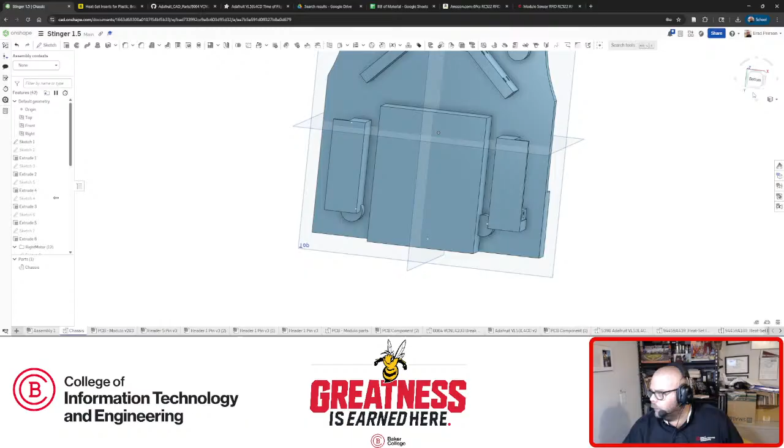So I want a bottom view. I want to select that. I want to sketch on it. We're going to make a rectangle, even with that front. And I realize I made it too long, because these need to be equal, but this is going to be 2, and this is going to be 2. And I don't think we actually need 2 by 2. I think that's going to be way wider than we're going to need.

Can I just midpoint off of this? SolidWorks would let you do that. Nope. Okay. We'll do the construction line method. Well, I don't really need a construction line. I can do it with a point. There's 2 ways to do it. Since I'm coincident with this top line already, first I like to get this out of the way so that I can put a point on the midpoint. To find that midpoint I need to get that dimension out of my way. There we go. That midpoint there, make them coincident, and we will be centered.

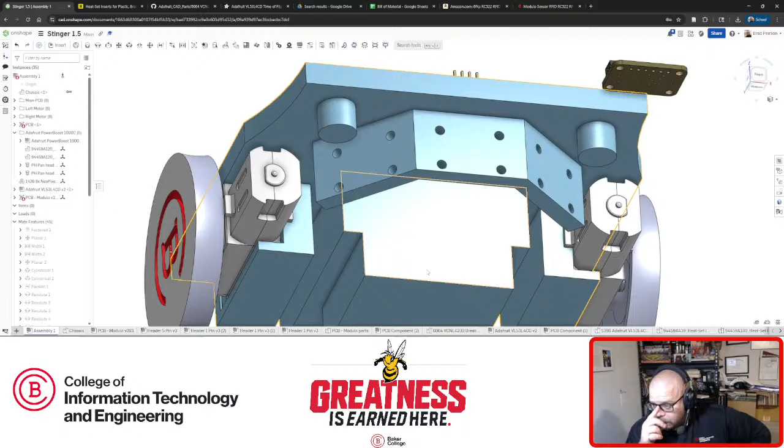Everything's locked down. Good. Grab that sketch and extrude it a whopping, what did I say, 0.625. Ew. And then, at that height, I'm going to have to seriously question whether the wheels are going to reach. I guess we can find out right now. Are we going to bottom out? We are getting dangerously close to bottoming out. Way more dangerously close than I wanted to be. But that's a thing, I guess.

Now we need to inset it. What did I say that was? That was 375 before we even get to inserts. So, wait. I think I misplanned the entire thing, because it's wider than 2. There's nothing to inset. I didn't leave enough material to inset, so I might as well forget the inset idea and just leave these guys hanging out in space. 2 inches came to like here, which means if I inset, I'm just going to cut away everything I just extruded.

So I don't need that extra 375. I just need a 1/4 inch. Yeah, I tried to get a little too fancy and changed my mind along the way, and it didn't compute. So edit, I really only need that 1/4 inch for the inserts. And I don't need to cut into this for insetting the connector pins, because they're going to be hanging off the back of this platform anyway. So there was a whole lot of extra calculation that really doesn't matter. Let's get the holes in and get this thing mounted and get on with life.

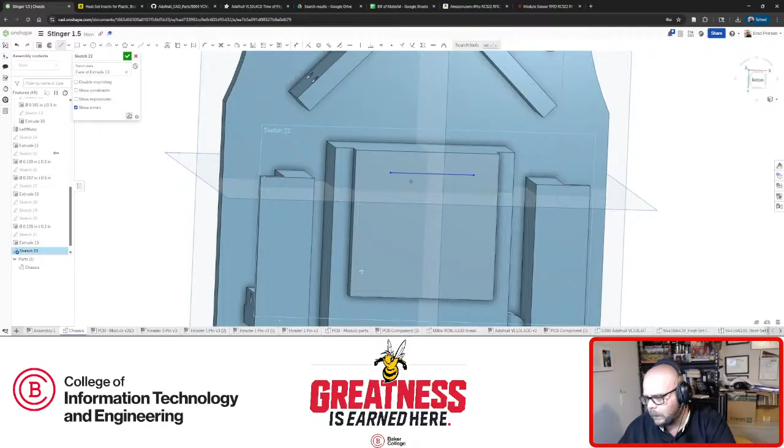Easiest way to do that is probably with a couple of lines, since it's not a rectangular pattern. A couple of lines and construction lines to hold it all in, centered about the things we want it centered about. So here and here, this line and this line we want vertical.

They don't really need to be for construction, because we're only using the points when we make holes. But this one, if we space this out, that one needed to be 20. Wait a minute, which end are the narrow holes on? That's something I do need to double check. Narrow holes are on that edge.

So that one is 25.88 millimeters, 0.88. In Onshape as well as SolidWorks, if you type in mm, it will give you inches here, but that is truly, if I double click, truly metric. Just remember that you can always type in mm if you only have a couple of dimensions.

If the entire thing is metric, whoa, I forgot mm. 34.25 mm. If you only have a couple of dimensions that are metric, that's definitely the way to go. If the whole thing is metric, by all means change the dimension standard of the entire model. Again, I forgot mm. 37.45 mm.

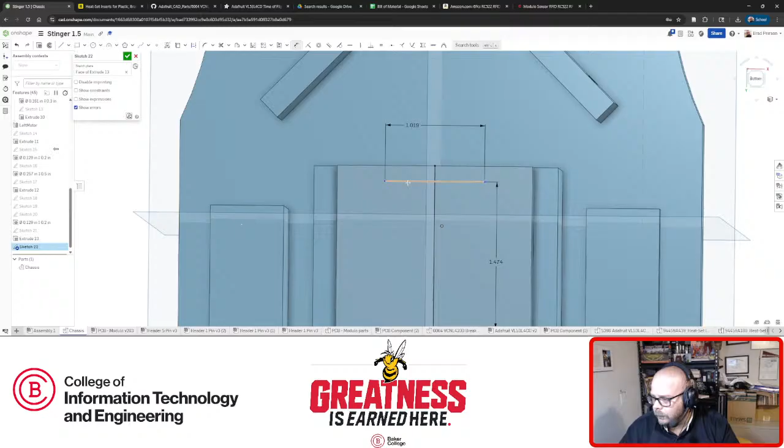Which is 6.78 millimeters from the front. So this, where's my dimension? Right there. And this distance was 6.78 mm from the front. And that gives us plenty of material all around for screws, or for threaded inserts rather.

So now, what does that insert need? That insert needs a 22 drill bit. 6.5 millimeters deep is 6.5, 25.4, 1/4 inch. It's a little deeper than a 1/4 inch, but we'll get away with a 1/4 inch.

Hole Wizard 22 drill. 22 drill. That's an odd size. What did I grab? An M3. 22 drill. Blind. 0.25 deep. Flat. And then we start grabbing points, which is going to be here, here, here, and here.

And these two, I'm going to go transparent again after I pop these in here, because I want to make sure, make transparent, where are you? I want to make sure I'm not in the battery, and I'm not. I got plenty, I mean, look at that. It's sort of filthy how much I've got.

In fact, I kind of want to make that thinner, but I think if I remember right, we already sort of made this about as thin as we wanted to go. Yeah, 120 thousandths, eighth of an inch-ish was the target. I don't want to go much thinner than that. I think the battery is by far the heaviest feature in this entire product assembly. So yeah, we don't want to do that.

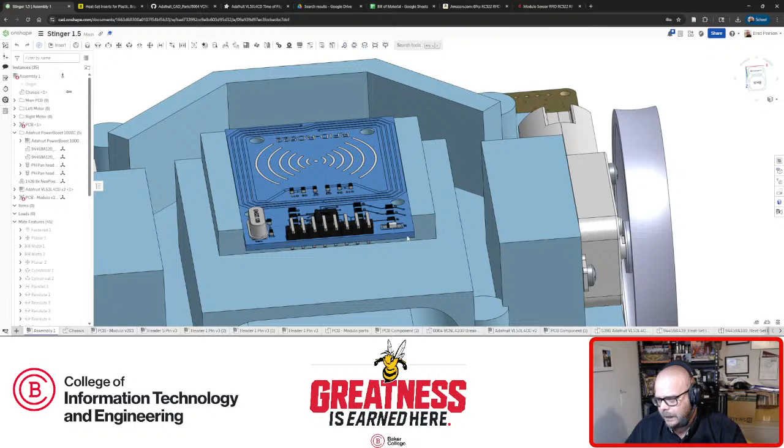Let's do that. At least get the PCB. Well, no, because even if I recess that... I'm trying to think. Even if I recess the PCB, then we run into another issue where I'll have to recess all the way out here in order to get inserts in. I also don't need that to be 2 inches wide. I think I can fix that in a minute.

I'm going to get this. Let's get this permanently mounted first, or something resembling permanently mounted, and then we can play. Parallel. All right, that was a motor mount? No, that was to hold the light in place.

Oops, this parallel should be for that board. I'm going to delete it because I'm going to mate based on holes, on mounting holes, not based on parallel surfaces. So we want revolute, because that'll lock us down in two dimensions here and here. Okay.

All right, now if the math and measurements were correct, first I want to swing this out of the way. I always like to swing it out of the way and let the mate swing it back. That just double checks and makes sure everything fits. Here and here, and it should. Hey.

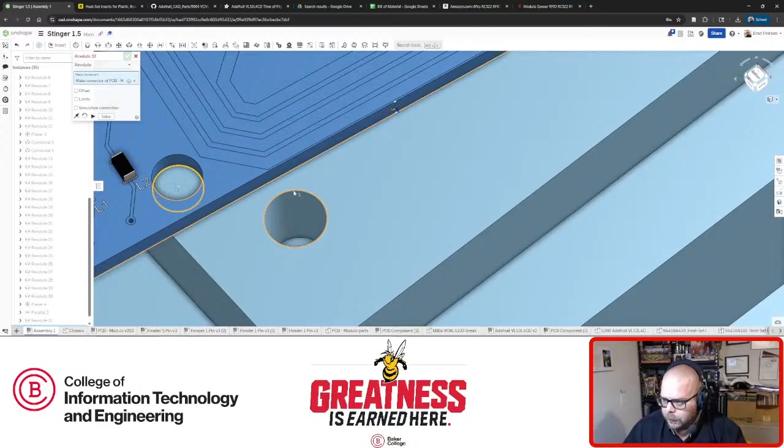Oh, no, see, so the fact that this is red, even though it swung it into position, which is weird, like SolidWorks would have just plain freaked. That tells me that something ain't right as far as measurements go. So I'm going to delete that one. I'm going to check and see if I get lucky by mating this hole.

Probably not. We'll probably have to end up doing a parallel mate and cheat it, because we're close enough. So if I accept that, it likes those holes, it's just those other holes. I mean, we're close enough. You can tell.

If I make this transparent... like, we're not concentric at all. I was going to say we're about as concentric as we can get. There we go. No, we're not. We're off by quite a bit.

All right, let's get rid of that. Let's take another measurement. Hole to hole is what? Center distance, 34.25. That's what I set my holes at. 34.25. Let's double check the sketch and make sure.

Edit. 34.25 millimeters. I mean, right? Did I miss something? Here, here, here, 34.25 millimeters. Okay, what about the holes underneath it? I'm sorry, am I missing something? These are the things that make you wonder sometimes. And measure that, 34.25.

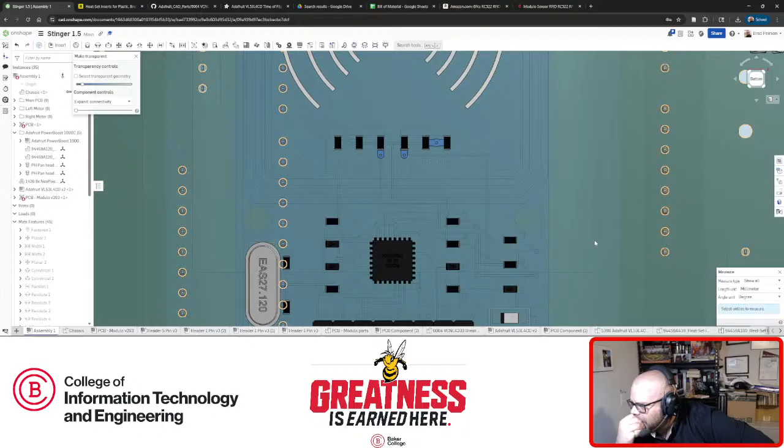Except, like, I'm 100% confident that those holes are not concentric, even though they're showing the same center distance. So what did I miss? Am I going nuts? I mean, I guess... mention in the comments if you can see what I missed, but those are definitely, especially if we make sure we're at a bottom view, looking straight on, not concentric.

They're also definitely measuring the same. So here, let's grab the whole cylinder of the PCB here and here. 34.25 millimeters. Grab a bottom view, make sure that looks right. Right, make sure it's going center to center, I should say. Center to center, 34.25 millimeters. And if I hover over it, it is exactly that. There's nothing hiding. Now, if I go cylinder to cylinder on the screw hole, 34.25, and it is that.

I mean, every once in a while, I guess you just have to take the loss, but this is going to bother me. Why are we off? I mean, another option would be... I don't understand what's off about that, but I'm going to fix it. I am going to fix it because it's definitely off. Like, these lined up, it let us mate those. Well, plus, I'm also trusting a random 3D model that I downloaded. I don't want to insult the creator of said 3D model, but I'm trusting a random model that I just grabbed that happened to match the part number I'm using.

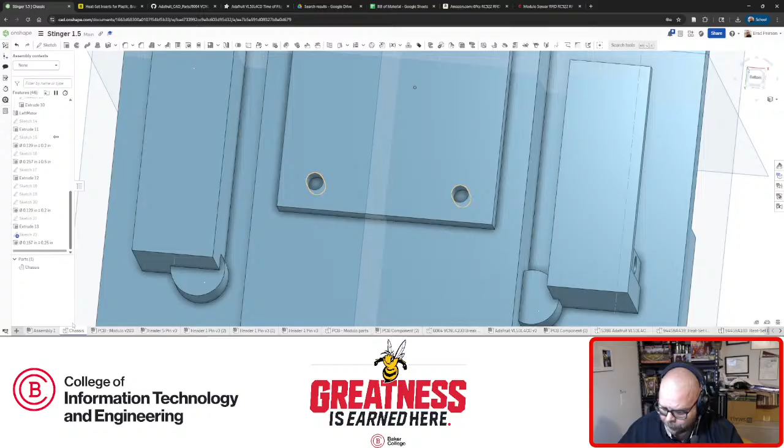Let's be real. So I'm trusting that, but the fact that those holes don't line up really bothers me, especially since, measurement-wise, they do. So what I'm going to do is edit this sketch and just delete this measurement, and do an in-context on these points. So I need to get out of... so there's no, like that sketch, the minus sign, it's underdefined, right? So now I can edit this in context.

I honestly don't know what different contexts do, I'll be honest with you, not used to that. But I can edit this, and I'm going to make it just concentric. I'm just going to straight up grab that and make it concentric. Where are you? Concentric. You can't. Why can't you? Why can't you? I'm sorry.

Edit. All right, what if I get rid of that? Maybe the height is what's off? Maybe it's like a triangle problem? I'm sorry, what's the problem? Concentric. All right, it liked that one. It moved the other one in because, of course, we centered it. So if I accept that, now if I go to the bottom view...

It's... now that one's off. Are they not centered? I never checked that. I never actually checked that. I'll bet. Yeah, I'll bet. Let's do that. Edit, undo, undo, undo. I'm back to constrained, so all my dimensions are back. I never checked to make sure that whole pattern was centered.

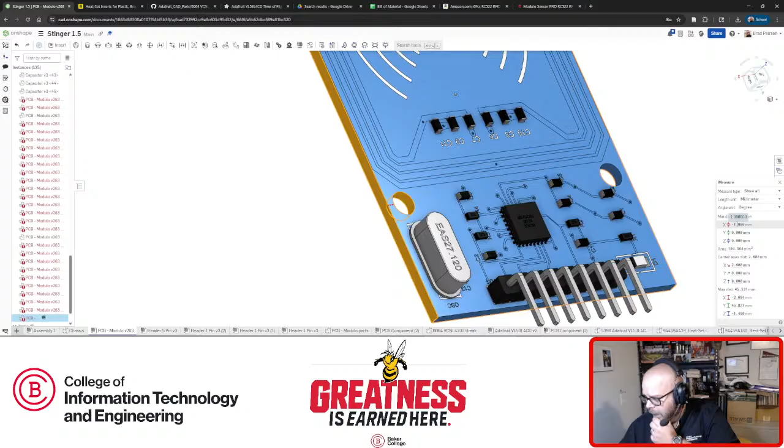Oh, I'm not seeing why holes don't line up. I'm straight up not seeing why... are these the same? Edge to edge, maybe those are the ones that are off. 5.22.

Aha! Those holes are not centered in the PCB. These are. So, what do we do about that? What do we do about that? What do we do about that? We edit the sketch. Edit. Edit. We edit the sketch. This dimension's correct. This dimension's correct. This center is not. So, this midpoint.

Let's delete this whole line and this whole line, because this bottom one, the longer, wider spaced one, is centered. I like whatever dimension that happened to land at.

Why is that movable? Something's movable, why? Something's blue, that means it's movable. What's not defined? Okay, you're not vertical. All right, I was guessing that. Vertical—that's fine, that's good.

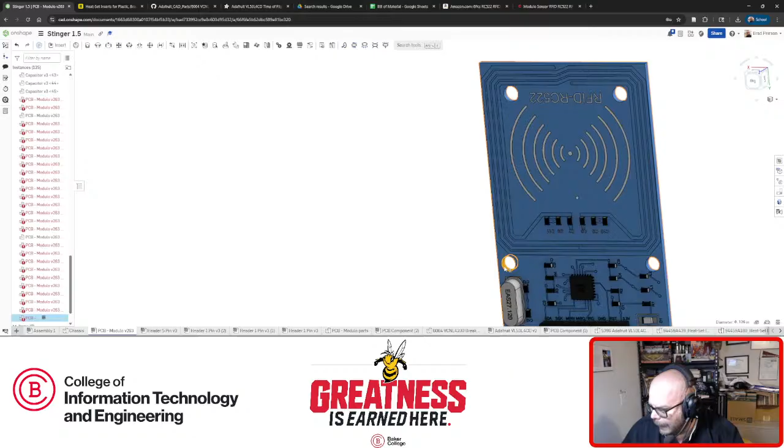Now this should be able to move side to side, which is what we want because it needs to be shifted. The easiest way to shift it is based on this hole. So I'll measure this dimension from here to here in the X direction and base that top line on it—hole to hole, along X, 4.32 millimeters.

4.32 millimeters here to here. I've got to make sure I place my cursor in the right spot—4.32 millimeters. We're not quite centered. Let's go with that and see how that lines up.

Let's go back to our assembly. Now I'm going to delete the revolute that actually locked it down, because if things worked out I should now be able to go opposite hole. You're witnessing something I usually try to do—when I mate a mounting pattern like this, I try to mate opposite holes for just that reason. And there we go, now they line up—it was just shifted.

If I do a double check, get a good bottom view so we're straight on it, transparent to this guy—concentric, concentric, concentric, and concentric.

Now if we're off a little bit, like if the model I downloaded isn't perfect—because again, I don't want to insult anybody, but I'm trusting a model, it was the first one I grabbed—if we're not perfectly concentric, a couple things can happen. We can shoot for 3 out of 4 screws, that's not going to kill us. We can print another one with the right dimensions, that's not going to kill us. We don't have a lot to lose doing it that way.

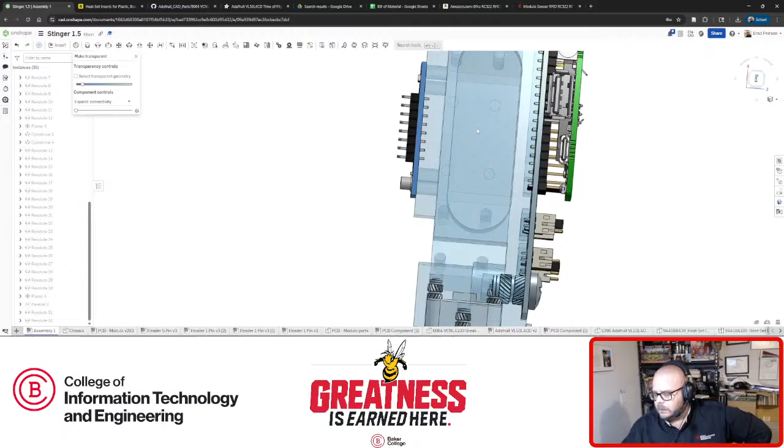So then I want to make double sure I go transparent again and confirm we're not encroaching on the battery. We're not—in fact I could probably go thinner in that space. We're only spaced that far down, only that far down.

I want to go to a left or side view. See how far down that connector is? We've got a lot of wheel there still, but I'm not nuts about it. I want to try to squeak that RFID sensor up as much as I can, which means this is going to get thinner than 1/8 of an inch, but only where those holes are.

So what did I shoot for in other places? Let's go back to the chassis—what did I shoot for thickness elsewhere, like here to here, say? What is that? That's 100 thou. Well, so I didn't cheat it much. What are these? 125—I went for 1/8 of an inch.

I suppose I should stick to my own design principles, right, and leave that at 1/8 of an inch. Leave that hanging down out in space, all nasty like that, and just get on with my life, go about my business. Probably the way to go.

Now, I'm thinking it's getting late. I'm going to try right now to get those other two color sensors in, or at least get the mounts in. It occurs to me those other two sensors don't need to mount like this one—the RFID needed to mount here on the battery compartment because, frankly, where else is it going to go? It's freaking huge underneath here. Where else is it going to go?

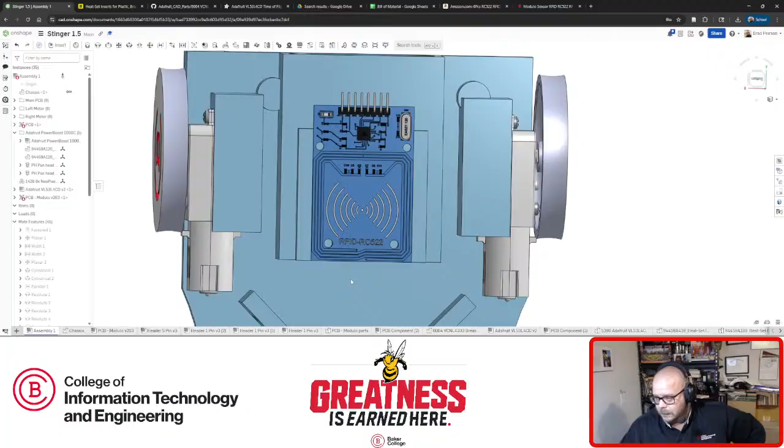Those color sensors are kind of small. They'll fit in this area somewhere—I sketched it in already. They fit. Honestly, now that I'm looking at things, I'm thinking of keeping those up in this pocket, as tight to this surface as I can.

Because everything I just added is a natural light block. Those are color sensors, or light intensity sensors, I should say—ambient light is going to screw with those something fierce. If we shield it, it doesn't help shield the ground—like if too much light shines while we're following a black line, they're still going to lose the black line. It's kind of a thing. It's a thing.

But I'm thinking if we tuck those up in here nice and tight, at least they're kind of in the dark-ish, right? It's acting like a natural sort of shade, and that might help them function better. It's a theory. They have the range to see from here down. That's not an issue. What was it, 50 to 100 millimeters?

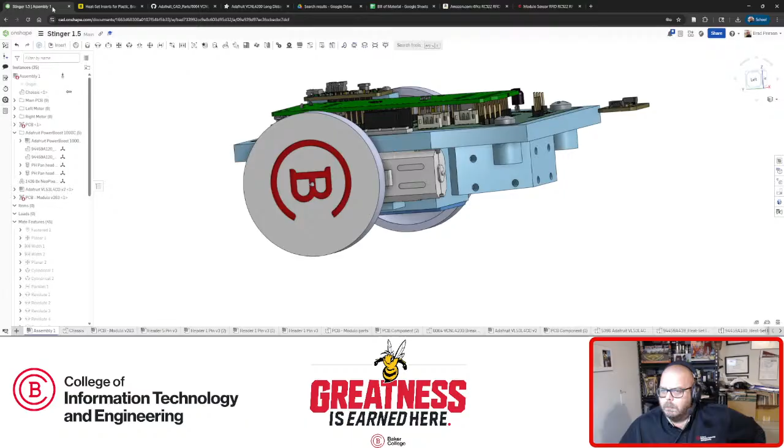It said, I think. I probably need to back up a few pages. This guy, that's what they said to shoot for. 50, so basically 2 to 4 inches-ish. So we'd be kind of in the sweet spot better anyway, the higher up we went. So I like that. I'm going to tuck them up in this pocket, formed by this mount here. I'm going to tuck them in there as much as I can.

So now I need to go back and double check exactly what. Let's go to the chassis. And let's get rid of the. Oh, well, it was the same board, right? It was the same board as... Wow, I gotta go in and clean some of this stuff up. The same board as this, different part number. Oh no, this is the light sensor. The time of flight was the one that had the symbol. So this is the right one.

This was 0.8 by 0.5. 0.8 by 0.5 is the mounting pattern. The board, I think, was 1 by 0.7. Oops, got to deselect those other sides. And there we are. 1 by 0.7 is what we need. We need to tuck that up in the chassis on this surface. Let us sketch and do this. Dimension that as 1 by 0.7.

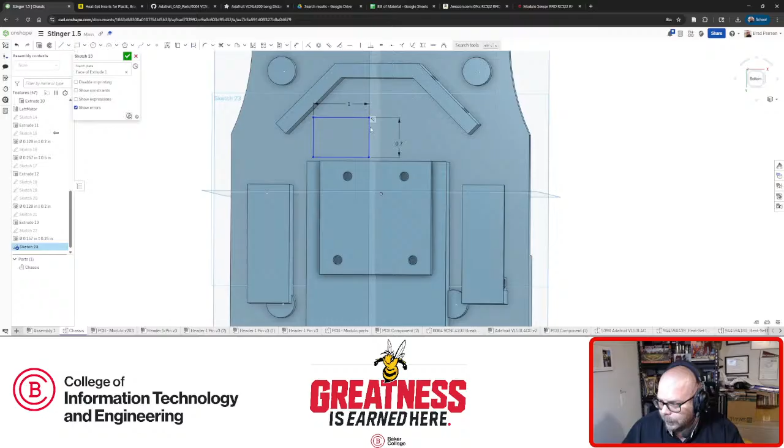And I mean, the thing is, I was worried about wires earlier. One, I can come basically all the way back here, close to it, all the way back to the battery, and as far out as I can go. That gives me the maximum width while still being tucked up in here. But at the end of the day, I don't need enough room to get my fingers in here to plug them in. I can plug them in together and then mount them. The concern was just to have enough room to get the wires looped up in here somewhere and tucked out of the way, so they got somewhere to go.

1 by 0.7 though, I'm almost positive we're going to need a little extra. I'm going to set this and this to construction, because I'm going to build a bigger rectangle to account for the fact that we got to get inserts in it. So this is probably going to be 0.825. I'm going to start by adding an eighth of an inch to this. That's going to be the defining rectangle we're going to use for a platform to put these on, because we need a platform tall enough for the threaded inserts.

I'm going to line it up right with the battery box. We might as well, it's right there. We'll make it coincident. I'm going to try, I can't say it's going to work, to make it coincident with this edge of the battery box as well. Coincident. I mean, it's kind of iffy, I'm going to be honest, because it's going to get so close together. I'm a little worried, but we'll try this and see what happens.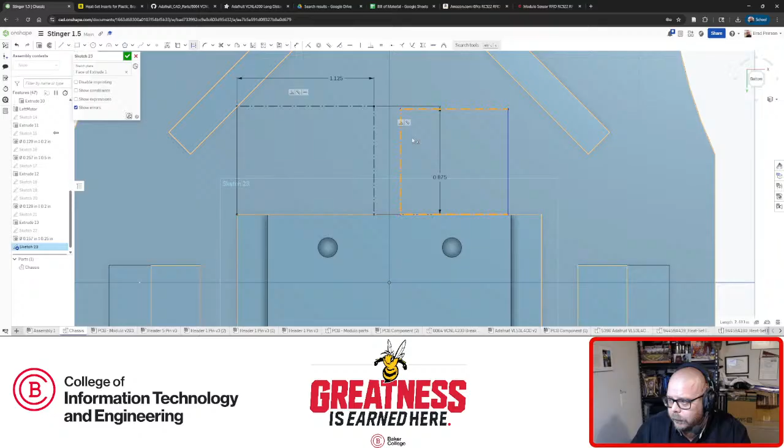So again, here, these three edges are for construction. Then I'll connect them with actual non-construction lines, but they're coincident and equal. I do like how Onshape keeps things selected for multiple sort of constraints like that. Let's make that coincident. So that's what we're looking at. How far apart are we now?

1/4 of an inch. Where's my handy dandy calipers? I need to visualize a minute. Those wires aren't very big. Honestly, it might be hard to visualize if I just hold the calipers up to the camera, and I don't have a banana for scale. But 1/4 inch should be enough. That is a big should. That is a very, very big should.

I'm also concerned about how that's actually encroaching. So maybe height-wise, since I just guessed and added 875, maybe we make this and this coincident and just let it be what it'll be. So it's just very slightly shorter, but the alternative was to let it pierce that and extrude up, which really wouldn't have hurt anything.

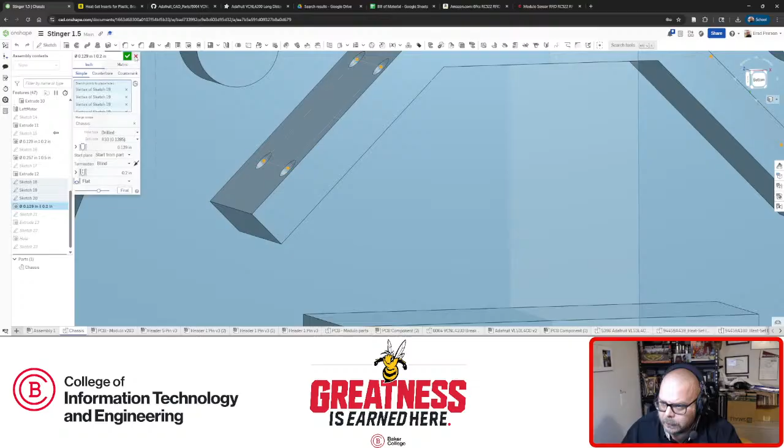So realistically we need 0.2, right? This sketch has to be extruded 0.2. Extrude 0.2. We want to keep it as tight as possible. Those boards, they don't need to be, why are you red? You're red because you're encroaching on that? Is that what you don't like? What if I merge with all? Yeah, it doesn't like that. What does it say? Did not regenerate Boolean operation resulted in non-manifold body.

I will admit, I have taken some pretty advanced CAD courses. I will admit I do not remember what non-manifold body is trying to tell me. I'm willing to own that. What I am going to do is edit this sketch. I'm going to delete this coincident. I'm going to see what happens if I make it bigger and make it encroach the way I had it in the first place.

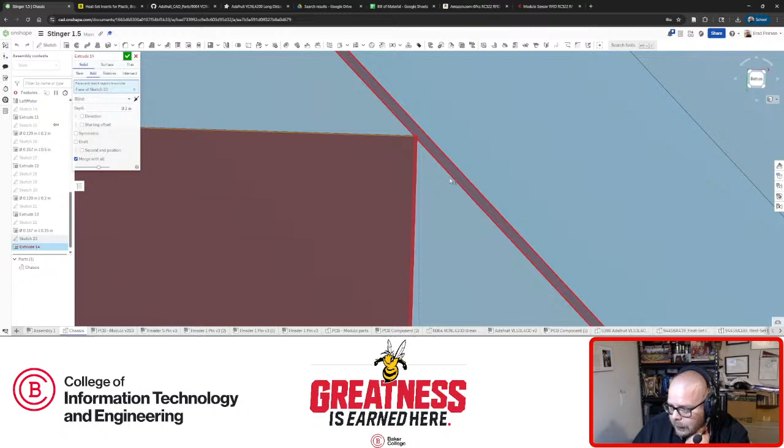I have a feeling the problem is it is contacting exactly that point. 0.875 is what I had it at. Now, it should be ever so slightly piercing it, which should, no, you still don't like it. Do I got to get taller? Because it's so close. Well, so close doesn't matter, because CAD, remember, CAD is exact. I don't care whose CAD you're using. CAD is exact.

So I'm going to go even taller. I'm going to go an inch. Well, now, wait a minute. Why did you pull in? Did it not delete that? Because you're still coincident. Where's the coincident? Is that the coincident? No. Which one? That's the coincident, right? Delete that. That's why. You need to be now coincident with that edge. Let's go back to the 0.875. Now, an inch we might want to be at.

All right, so we got our extrusion. We are ever so slightly pierced. Notice it's a little flat. It should be equidistant. I hope we're pierced there. And actually, I probably do want to make it a little taller. I want to pierce it more because eventually I'm going to pretty this up and fillet everything, and I think I want more meat there when I do that. Yeah, probably. It won't hurt anybody. The fillet will add more material. Let's leave it there.

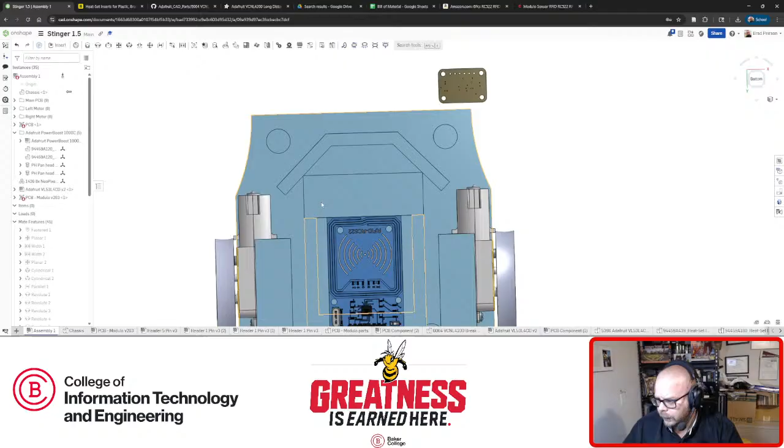Let's go ahead and sketch on that bad boy, and we need just a couple of rectangles, right? We will line them up. Coincident that, and we will equal top, equal the sides, so we only have to dimension one of them. Since I didn't write down any dimensions, we need to double check spacing. Spacing 0.5, 0.5, 0.8. How's my memory? Memory's holding on. 0.5 by 0.8.

Dimension 0.8 on the long side. And again, these are truly standard measurements. They're not like those sneaky metric ones they try to sneak in on us every once in a while. We'll see how it looks once it's assembled. Kind of thinking we don't need to even encroach on this platform at all. We do want these close together, so the width, we can space them out a bit, as much as I can stand to space them out.

What is the diameter? 157. I'm going to throw a construction circle in there. This is a trick I've used before. I know I'm going to end up with a hole like this, so I'm going to throw that in there as construction at the right dimension, which was what? 150? No, is that the right hole? Which one was the right hole? I think it was the 129, because these were the bigger holes. So we're going to throw this in at 129.

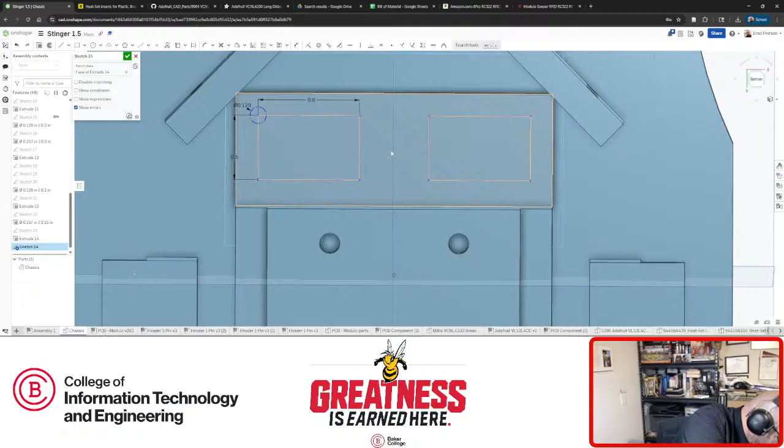But one thing I'm thinking: to follow a line, we want these guys as close together as possible so the line can be thinner. And that's not this direction. If we think about this, go back to the big assembly. Where's my big assembly? Oh, that is the big assembly, I'm just zoomed in. The closest they could be is if I would stack them on this edge. That's going to put these two sensors even closer together.

So I think I did all of that entirely 90 degrees around. I think they should be mounted long ways. Then I also don't have to worry about cable to cable. I do need enough room to come out the back with a cable. They can't be directly up against this, right? I gotta have somewhere for the wire to go. But if I switch that around, and make this 0.8 and this the 0.5, that's the orientation that gets them close together.

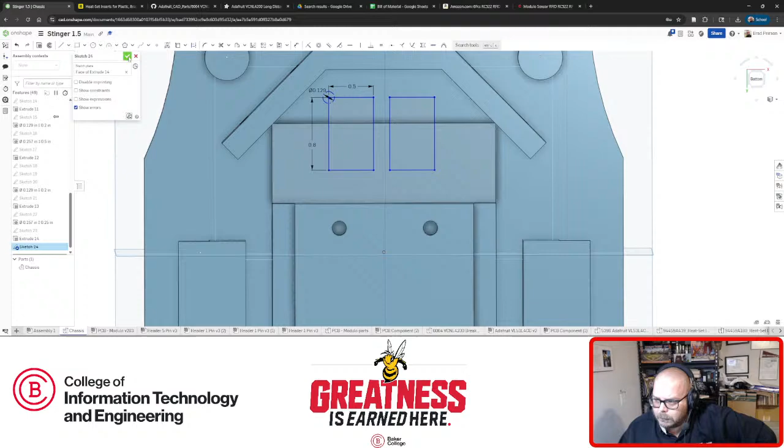And at that point, this is the hole pattern, so I can't butt these up, but I can get pretty darn close. I like that, and then I can center them in this gap. That gives me room for the cable coming in, cable daisy chaining. I dig it, I'm going to go with that. First I'm going to accept that sketch, leave it where it sits, and then modify this sketch. I am going to let it touch the battery compartment. I like that sort of anchor point.

We're going to call this 1.125. I'm just going to flip those dimensions the same way I did. What? Oh, it's because it's constrained at the edge on each side. I got to break them both. And then this is effectively the board outline. I'm just going to move them in tight. And actually, we went bigger than the board. Can I do that? I guess I'll give it.

So 0.8 here, 0.8 here, 1.6. I'm thinking 0.15 as a gap, just to make it 1.75 total. And actually, I don't even have to do that math, I can just dimension the whole thing. Well, what does 1.625 get us? We'll have to check to see where the holes land, as in, do I have enough material, so I don't bump threaded inserts into each other. But I don't see why that wouldn't work.

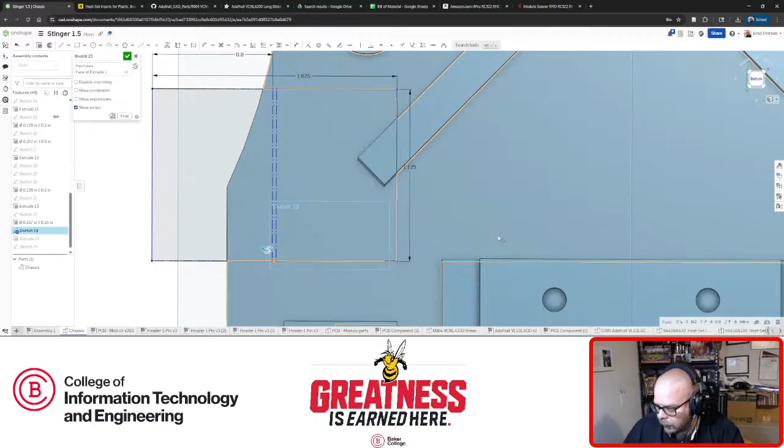So I'm going to go back to the old plan, the thing I did way back. I need a point on the center of this line, which is right there. Grab the center here, make that coincident, and we're centered. Just that fast. Except that now we're not tall enough for the plan I had, because these were roughly in the spot I wanted them. Not exactly, but roughly.

All right, easy way to fix that is to ignore the height altogether. Edit this sketch again. This 1.125, just get rid of it, and make this even with this surface here. Piece of cake, right? Coincident there. Boom, boom. What don't you like? Oh, you didn't like that sketch? Why?

Why? What happened? Which sketch don't we like? That's what I thought. Why don't you like that one? Edit. Delete. What's the problem with bringing this up here? I don't see why there should be a problem there. Except that sketch 23 is happy, but it didn't extrude it. Why didn't it extrude anything? That has to do probably with extrude settings.

Let's merge scope. Edit. Why didn't it extrude? Oh. The parts either do not intersect or are not totally contained. Like, dude, what? Excuse me? Well, merge with all definitely didn't work, because that's what it was in the first place.

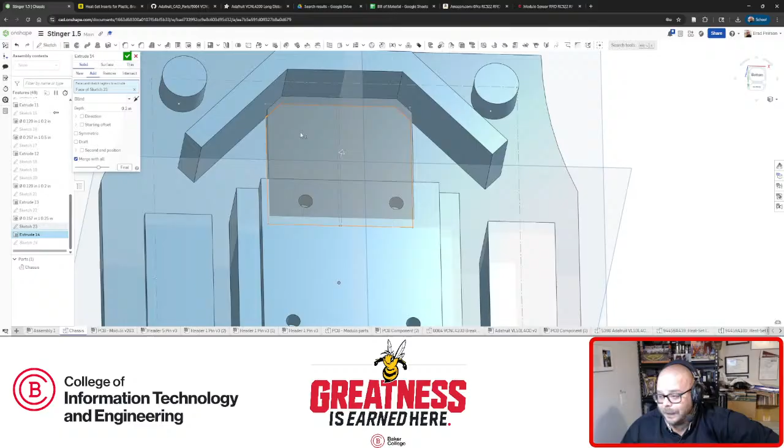I get the impression that it's only, okay, it's only extruding those corners. That was the problem. We want to extrude that part. I mean, that helps. What if I turn that off? Merge with all. There we go. So now we got a good, I mean, it's not hurting us at all. We got a good platform there. These are the hole patterns. Now we just got to basically center it, right?

So that sketch, edit. And actually, I'm going to do this same thing on two inner corners. And actually, I don't need to make them construction. We're just going to grab the points. I'm just going to set these equal. And I'm only doing this to make sure that I have clearance wall. I need some wall between the two inserts. That's really the only reason I am going through the hassle of adding those. They're just there for reference to make sure I have some wall.

Go ahead and actually, can I do this and do this? And I want to make sure those, okay, they move. They don't move, but I can then dimension a wall. Like I want, that's a little excessive. 100 thou. 0.05. Whoops, 0.5. Thank you. 0.05. That still feels like a mile when you really look at it, but I guess. And then we can just center this whole thing with a couple of lines.

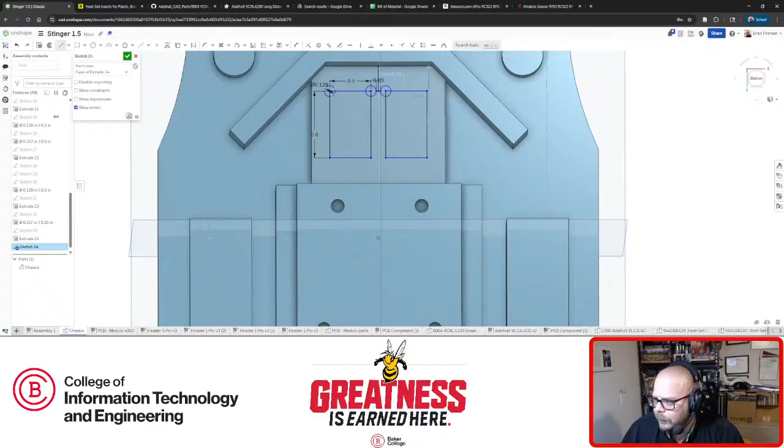One here to the center of this line. Where are you? I know you want to find it. There it is. You're going to be vertical. The same thing horizontally. That's not going to quite be centered, though. That's okay. So if I do it here, because of the 45-degree angle, I'm losing that corner. It's not going to be centered from here to here, and I want as much as I can get on each side because I gotta run those wires somewhere.

So best way to do a vertical centering. Suppose I have like a width mate, like, ooh, symmetric. What does that do? Oh, symmetric doesn't really work. Symmetric is not width. I kind of want a width, but I don't think I can do a width in, yeah, solid. That's not a rag on Onshape. SolidWorks wouldn't be able to do what I'm about to ask it to do either.

So best way to do this is I'm going to get rid of that line that I just created. I'm going to get these guys out of the way for just a second. I am going to draw a line from the middle of here to the middle of here. Right? That is going to serve as a way for me to go like this. And I'm actually going to drag them out of the way because I like to visually see that it actually made itself horizontal. So horizontal, we're vertically locked, right? Now we got to horizontally lock.

I can do that a couple of different ways. I'm thinking right now the quickest, since I'm getting ready to be done with this stream for the evening, is to just do another line and make them equal. And we're centered vertically, we're centered horizontally, everybody's happy. We accept the sketch. I don't want to select the sketch, I just want to do the hole wizard. And for that insert, we needed a number 30 drill. 30. 200 thousandths deep. And flat. And now we can just select all 4 of these points.

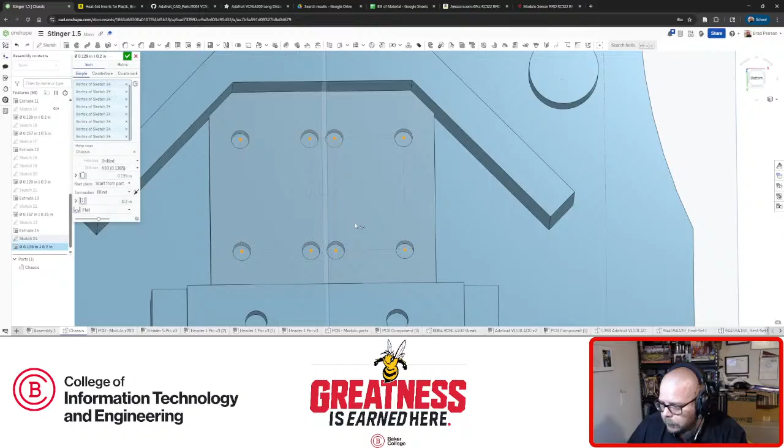And that's going to get those sensors way closer together than they would have been if I had mounted them in the other orientation. And again, these boards, I could have recessed them for that finished look. Well, now the question is going to be about the wall if the boards are too close together. So I'm going to get the boards in my assembly where they need to go. Which one? Which one? PCB component 2.

The 53 here, this VL53, is the time of flight. This PCB component 2, which I didn't actually fix yet, so fix and group, as always, fix and group. And then I can bring those in.

So let's insert those. Whoops, that was generic parts, not insert. Current document, assemblies. And again, that was called PCB component 2. Is that really how it's going to come in? I guess it is. All right, let's do it. 1, and that is different than the one I brought in before. And PCB component 2, bring in another one. All right, and the same as always, accept and revolute mates on the hole pattern.

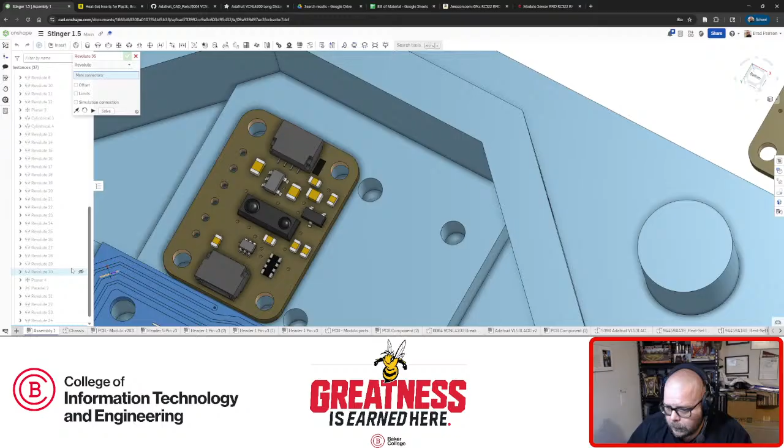So this whole top and bottom, I'm sure it matters which one of these. If I want them to be absolutely as close together as possible, I'm sure direction matters. But frankly, they're symmetric. I can figure that out later. For now, let's just get it in there. Flip. Good. And then again, I like to do diagonal holes when I'm doing a mounting pattern, just for sanity, to make sure the hole pattern actually lines up. Good. There's no red, everybody's happy.

And I can tell you right now that I am probably going to want to space those out just a touch. So now that hole, trying to pay attention to which one I grabbed so I can at least orient them the same for now, becomes that hole. And then here and here. Okay, now my boards are very obviously encroaching on each other. That means I just didn't define enough wall thickness there, right? So get rid of that.

Let's go back to the chassis and space mount. The whole purpose is for things to fit together. If things don't fit together, we have a problem. So 50 thou was not enough. I'm going to go to 125 and just see, accept it. And this is why I don't use the parallels, I mount based on the holes. As I move the holes, the board's going to move and I'm going to be able to see it after it refreshes. I've noticed it takes a bit, and I have not noticed a way to force a refresh.

That should be plenty. That's perfect. I dig that. And actually in that orientation, those should be about as close as they're going to get together, right? So even that orientation kind of works. Cool. I will also take a look at this next week, because I'm going to end the stream here in just a moment.

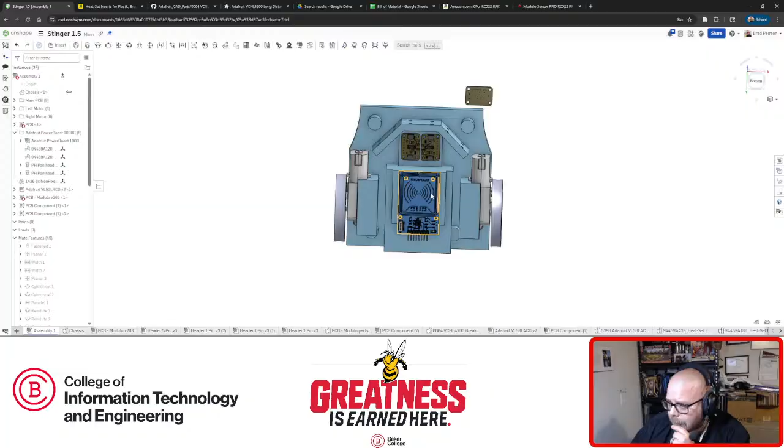Next week I'll make sure orientation-wise, and then of course get the fasteners and all the inserts in. I was trying to get the parts on and mounted where they belong, but at the end, I want a complete bill of materials, so I need to make sure all of the threaded inserts are in all of these holes along with all of the screws, plus I need to order some screws. I don't have a massive stock of very small metric screws just laying around. So while I'm here, because I'm anal like that, I don't want to leave this part hanging out in space for a week. So we'll get it mounted.

And again, I will have to verify which end of this is in from the Arduino and which one's out to the next board in the daisy chain. Because that's basically the only thing that's going to affect which way is up or down. And cool part is, can't really see it from this angle, but if we look, this is completely below the screw boss, which is what we want, especially when we get onto these. It'll just miss and shoot underneath it, which is going to be awesome. That means it's as tight up as we can get it, right? So we're kind of cool. I like it.